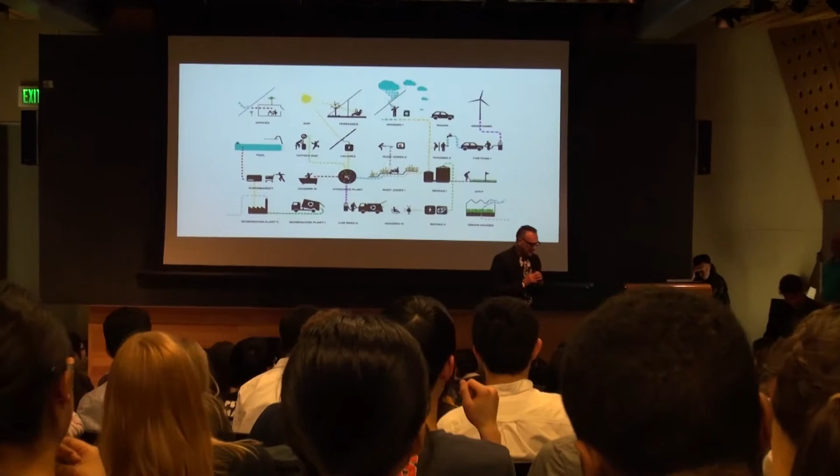I'm a graduate of Duke University. And you know, it's only Tuesday. They've already won a national title, and Bjarke Ingels is here tonight.

We're really happy to have Bjarke here. There's very little I can do to introduce him, you probably know a lot more about him than I know already. I will just say, for those who don't remember or don't know, Bjarke started out with an incredible practice with the best name of an office besides BIG, I guess, that I've ever really encountered: Plot. What an incredible title.

Also, it's a kind of a device, I think, for the way a number of practices in Europe operated, narrative-based, story-based, particularly OMA. I mean, if you all will remember, Koolhaas became a really important intellectual and architectural figure because there's a book, Delirious New York, that he wrote before he did very many buildings.

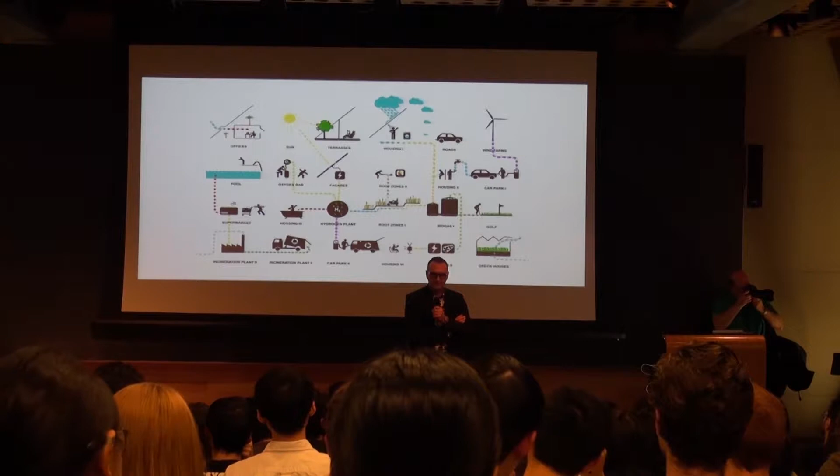There's a real way, I think, in which Bjarke started a practice in 2001 with Julien de Smedt called Plot, and then built a couple of really exciting buildings and made some small product design things and did some other things, and then founded BIG in 2005 and has really not stopped since.

At that time, the accent that charmed the world was a Dutch accent. And there's some real truth to the observation that someone made recently that that whole Dutch way of practicing, that whole intellectual model, moved north to Copenhagen, probably sometime around 2000, 2001, 2002. And now the accent that we're all charmed and taken with is a Danish accent, not a Dutch accent. I think that's true not only of the accent but of the ideas. That powerful intellectual model moved north.

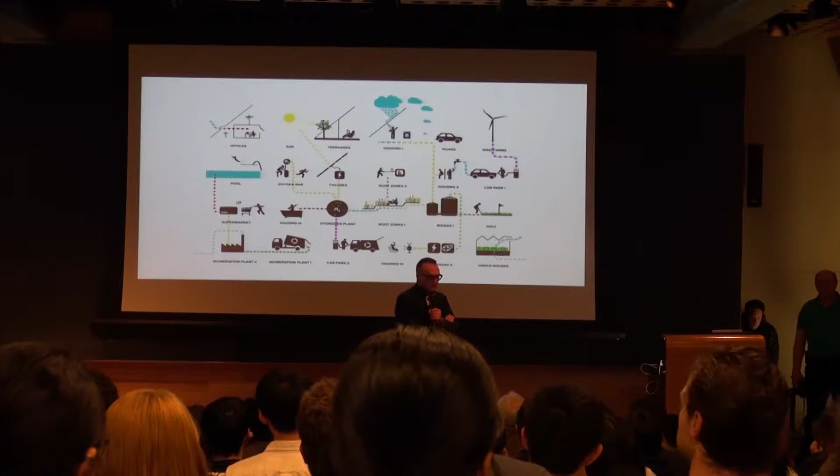As you know, and he'll show and talk about a lot of these projects, BIG has stakes put down on the East Coast with the 57th Street project, but more. Also very exciting, if you have not seen it, the exhibit at the National Building Museum will be up, I think, until August - an incredible show. The catalog is here, we have it in our library, and we'll get a copy of that signed later by Bjarke.

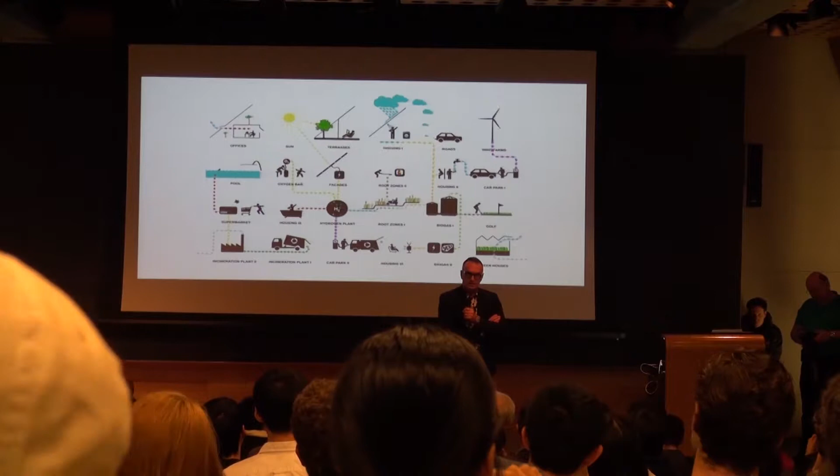Definitely should see that, but also he's doing, or the office is doing, a master plan, a 10-year plan for the Smithsonian. A lot of buildings on the West Coast, including, as you probably know, the Google campus, which is the coolest job I think ever. But with BIG, that's probably only the case for this year - next year they'll get the next coolest job ever.

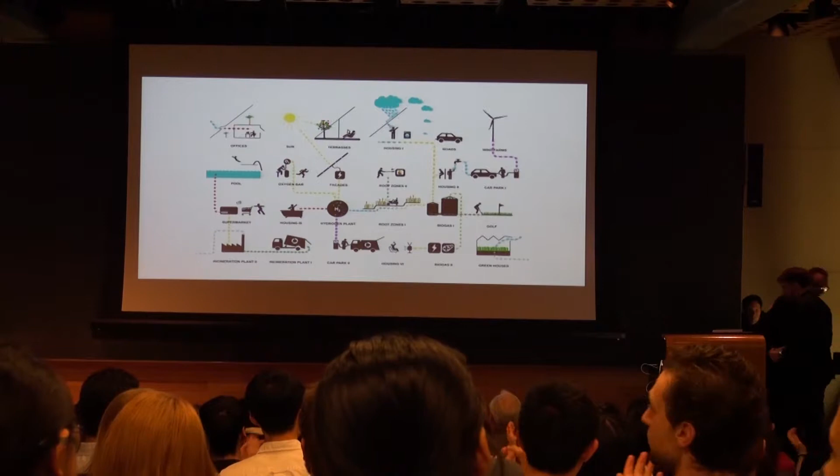Yeah, maybe just picking up on - we were just talking - I've been trying to come and visit Michael wherever he's been dean. The last time was at his former deanship, where he got a speeding ticket taking me to the lecture. So there's like some real investment in this.

But what I'd like to do is basically spend a little bit of time talking about the way we work in our office. Our office is obviously called BIG. We're located in New York and in Copenhagen. Our space is actually a former Carlsberg factory, where they used to make the least interesting part of the beer, the bottle cap.

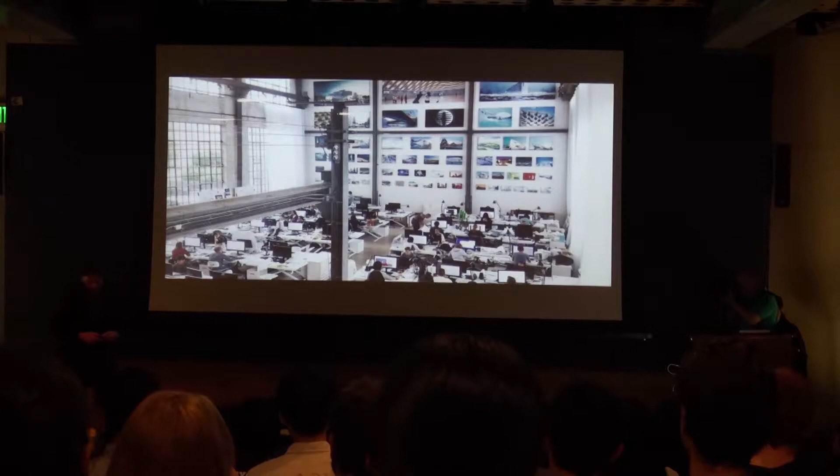We've diversified into haircuts.

Maybe every 5 or 6 years we've done a sort of exhibition looking back at the work we've done. When you're caught up in your work, you're only thinking about the projects at hand. But once in a while you have to look back and try to see if there's a red line going through the work so far. It becomes a way of almost like the Danish philosopher Søren Kierkegaard says, life is lived forward, but it's understood backwards.

We just came out of making the exhibition at the National Building Museum, this amazing space in Washington that I think nobody has ever been to. It's like this huge atrium with a gigantic colonnade on multiple levels going around, and they had given us 3 small galleries for our exhibition. They were really nice gallery spaces, but of course we really liked the atrium.

So we got this idea to turn the architecture of the museum into the architecture of the exhibition. Our galleries were placed on the 2nd floor, so we used them for films by various filmmakers showing the work after it's been completed. But we basically turned this sort of arcade into the exhibition design, so rather than building vitrines, each arch becomes a window onto a model suspended in the atrium. There's like 72 arches, so 72 models.

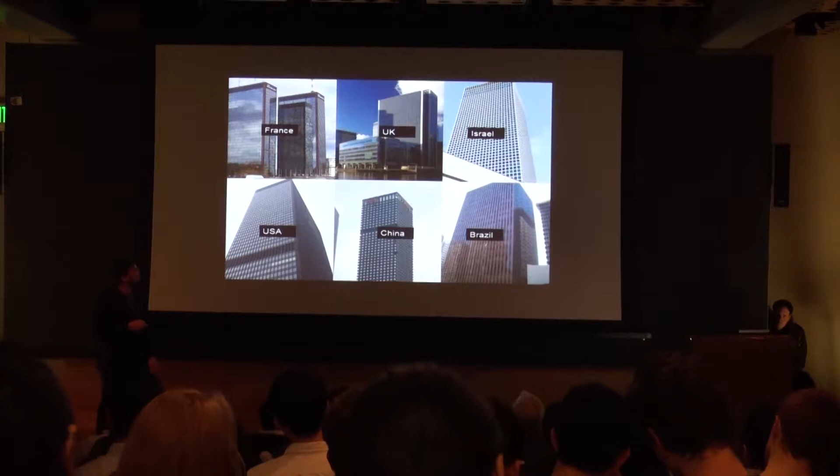What he was interested in was what he called vernacular architecture - essentially that over centuries, people in different places had found ways of responding to the local climate with local materials, optimizing living conditions and creating interesting architectural vocabularies that weren't academic or aesthetic, but purely empirical. Like the Greek villages with white surfaces that reflect heat, the flat roofs where you can enjoy the cool breeze in the evening. Like the igloo, also this perfect example where the spherical shape has the minimum surface to contain a maximum interior volume, creating minimal thermal exposure for the contained space.

These villages in China where the wind swept the flatlands - you have the sunken courtyards that are protected from the weather.

So what we in a way propose is not vernacular, like going back to vernacular architecture, but what you could call vernacular 2.0 - essentially using the fact that today we have sophisticated technology that allows us to calculate, simulate and model the environmental performance of a building, like the thermal exposure of a design, or the wind flows through a building or a master plan.

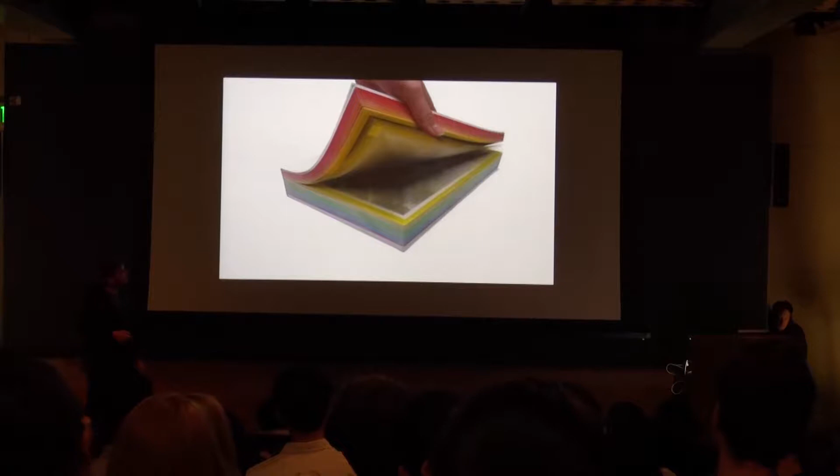And as a nice side effect, all this rainbow of frames become this nice gay flag on the edge of the book.

And also, sometimes the most interesting thing about a book is the cover. Here the cover is as white as can be, and it's actually the content that is the flashiest part of the book. And then it has a dust jacket, which is this thermal map, where hot and cold create this pattern of the flow from hot on the front to cold at the back.

So maybe just to start this odyssey, one of the warmest climates we've worked, and one of the first times where we started to work with this idea of engineering without engines, was when we got invited to do a competition for the main energy company in Shenzhen in South China, right next to Hong Kong. It's the most industrious region in the world.

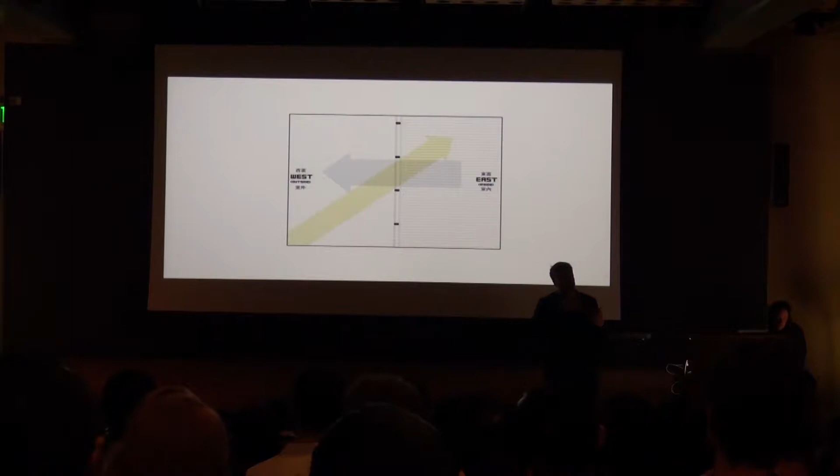Most of the stuff you own is probably produced in Shenzhen. So as a result, the energy company does consume and deliver a lot of energy. We thought: it's basically a 1 million square foot office building in a subtropical climate, and you have this dilemma between wanting to maximize daylight and views, but wanting to minimize thermal exposure and glare.

As a result, together with Arup, we developed this idea of a facade, almost like a pleated dress, that opens up to views and daylight to the north, but shuts off the direct sunlight from the south. So when you look towards the sun, you see these bamboo veneer walls washed in daylight, and as you turn around, it becomes a completely transparent facade.

Within this logic, we can pull out bigger openings for the main entrances. We can create this sort of stack of executive meeting rooms and the sky lobby.

So basically, this logic alone, without any moving parts, any sophisticated technology, actually reduces the air conditioning loads and the energy consumption by 30%. We developed the principle together with Arup. So there's nothing sophisticated - it's purely the geometry of the building that has this impact.

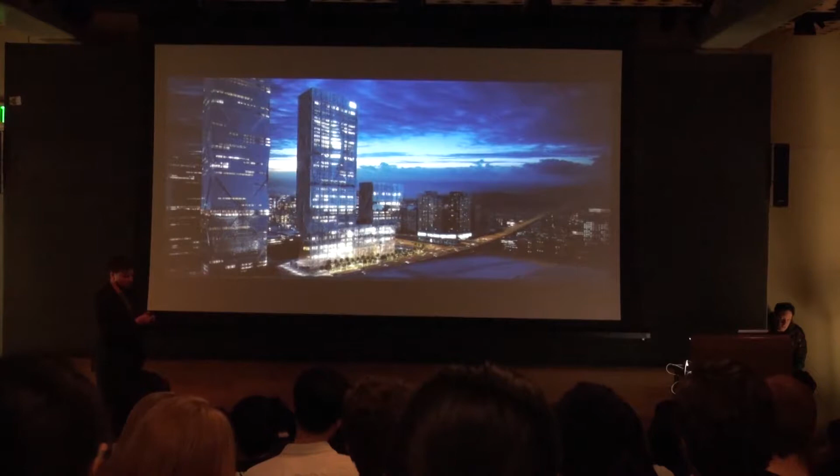Also from inside, of course, it has an impact on the experience of the building. And essentially the main idea is that what makes the Shenzhen Energy headquarters look different is also what makes the building perform different in terms of its energy pattern.

It's currently under construction in China. After digging around underground for three years, we're finally going vertical at a pretty amazing speed.

So basically, when we were looking into this project, we had won the competition on this design, and an interesting thing happened: the clients fell in love with the design of the building, like the way it looked, not so much the performance.

So we started developing the logic further, and we actually proposed a series of modifications to the envelope that would make it perform even better. But at this point, they had fallen in love with this reading that the building looked like a Chinese girl walking through the city or something like that, and we couldn't touch the design because it had already been signed off by decision makers high up in the food chain.

But then we got invited to do a competition for the Museum of the Human Body in Montpellier, in the south of France. Montpellier is almost like the cradle of modern medicine in Europe. Its proximity to North Africa and the Middle East made it a perfect place for the coming together of Western and Eastern medicine.

It's the home of the first botanical garden for medicine in Europe, the Jardin des Plantes. And the museum was going to be located between the city and this new park.

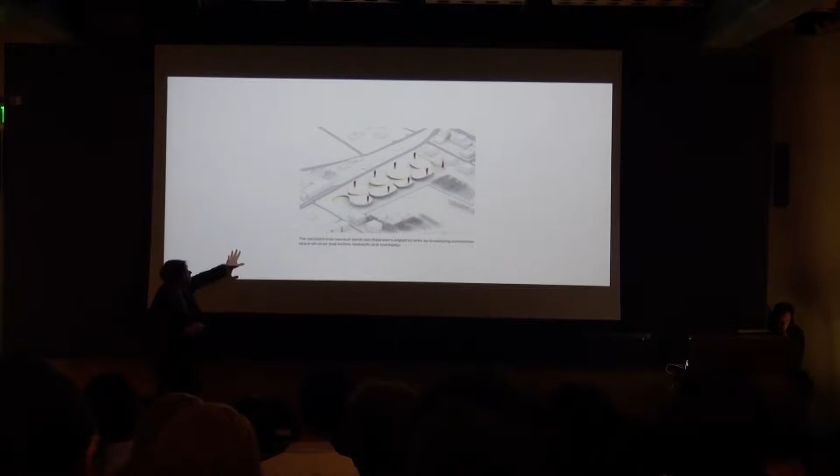We basically took this functional diagram and placed it in the park, but rather than becoming a big wall that segregates the city from the park, by having this sort of undulating zipper line, we dissolve the building. Even though it functions as a single entity, it ends up appearing as a series of pavilions, and it creates these pockets of city that come into the park, and pockets of park that come into the city, almost like a confluence of pavement and green space.

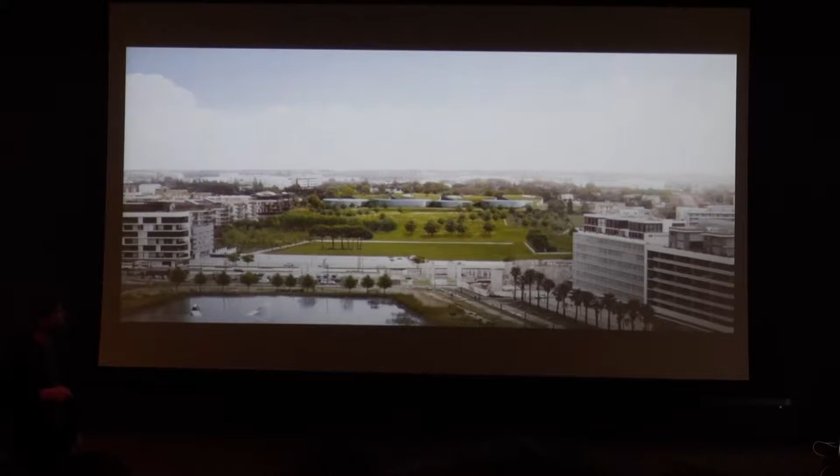So you see the city coming in and becoming like a little paved island overlooking the park. And in reverse, the park sort of flowing in between the hard paved spaces of the city.

Montpellier is not only the cradle of modern medicine in Europe, it's also the hottest city in France. So we wanted to have glass facades to create a relationship between the program and the park, but we would have to somehow provide some form of shading.

Following some of the logic we had developed in Shenzhen, we looked a little deeper into the issue. One thing we discovered in Shenzhen is that when you're facing south, the ideal louver is actually horizontal, because the sun comes from a high angle. Horizontal louvers block the high incoming sun and provide open views.

But when you are facing east or west, the more ideal louvers are vertical, as we did in Shenzhen. Also the main facades in Shenzhen are east and west facing, that's why the logic makes sense.

But when you apply this logic to a curvilinear facade, the ideal angle actually changes more gradually from horizontal through a whole series of different degrees of diagonal to vertical.

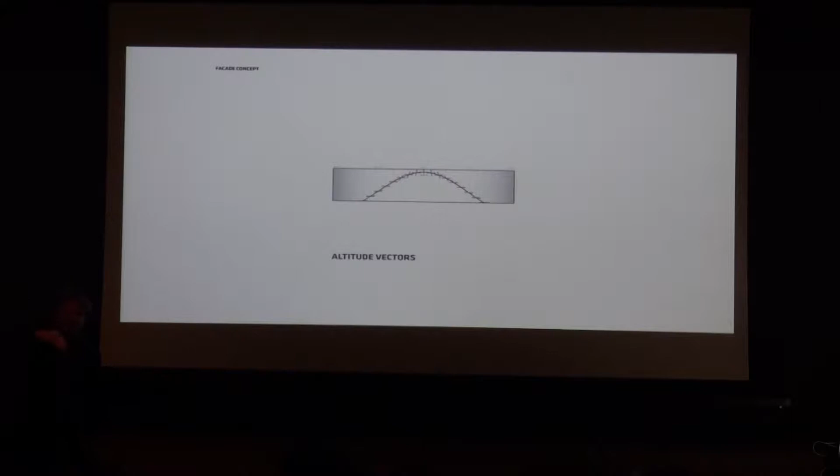So we created a script that is actually applicable to any location on the planet, but in this case we did it for Montpellier, where we can calculate the incoming angle of the sun for different orientations of the facade. That translates into this curvilinear pattern that almost looks like a human thumbprint.

It gets this sort of ornamental character, but it's really a scientific approach where each orientation of the louver is optimized for the angle it's facing.

So we applied this script to the facade, and as a result we get this almost environmental ornament on the facade depending on where it's oriented.

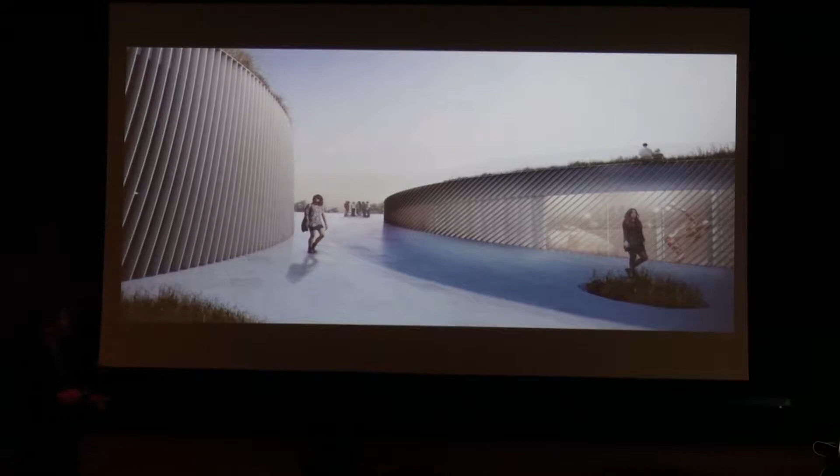So everywhere you encounter the building, this organic aesthetic is purely a product of optimizing the environmental performance of the envelope. In a way you can actually turn the environmental performance of the building into something that really drives the aesthetic aspect of it.

Sadly, shortly after we won the competition, there were elections, and the new mayor is a former postman, and now he wants to make a postal museum instead. So I think right now our biggest challenge is to convince the mayor that this could also be a very nice postal museum.

The response to the climate doesn't have to be defensive. It can also be embracive and joyful.

One example is that we're doing a project in Nassau in the Bahamas, in a community called Albany. It's Tiger Woods and two real estate developers that have come together to make a very nice place for fortunate people.

It's actually, if you watch the scene where Daniel Craig comes out of the water in Casino Royale, flashing a perfect torso, that's this place. And they made a marina where you can park your 300-foot yacht. When I was there on a site visit, Steven Spielberg was trying to park his 300-foot yacht.

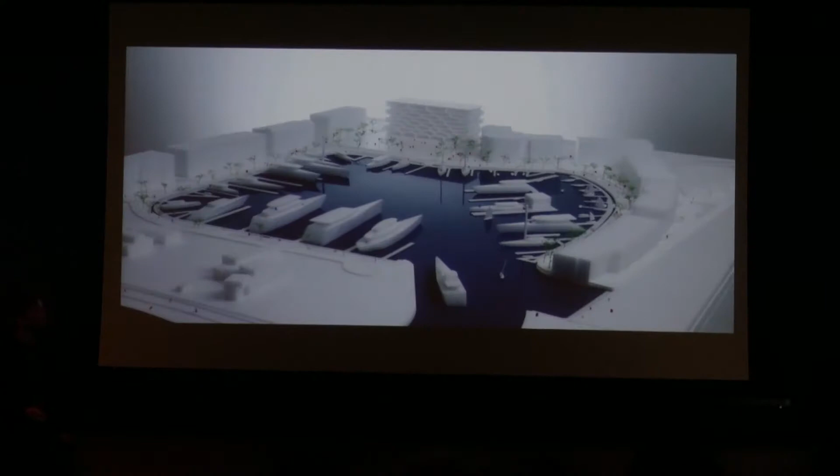And there they asked us to do a project of basically these condos facing a square. Because it's such a nice climate, it's facing south, it's overlooking the marina. They wanted each home to have a pool on the balcony and a 15-foot deep balcony.

They had already done it on three buildings under construction, in the form of making a bathtub, like a giant bathtub on top of the balcony. And we thought, if you're going to have a pool on your balcony, you really don't want to jump up into it, you want to step down into the view and overlook the marina.

So we designed each balcony in such a way that it sags in the middle to create a space for the pool. The body of water always sits on top of the partition wall of the two units below, so that the 12-foot tall concrete wall can actually function as a giant beam to carry the load of the water.

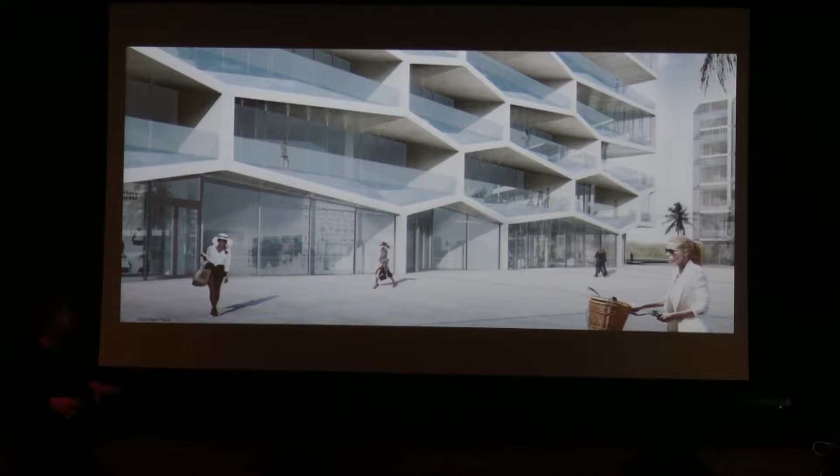And basically, from the outside, this way of incorporating the pool sort of creates a character for the homes. Also, the sloping ceiling of the balcony becomes almost like a porch, almost like as if you're living in your own little villa.

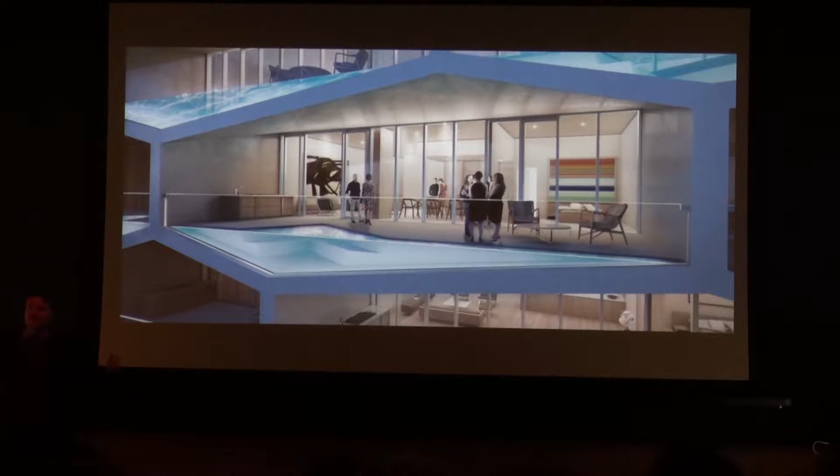And basically the handrail, like normally when you make renderings, you kind of cheat and you eliminate all of the practicalities and you just have a single sheet of glass. In this case, it is actually a 75-foot long single sheet of acrylic aquarium glass that is the handrail and the facade of the pool.

So it's like this sort of incredibly slick, non-detailed balcony. Also, of course, it really becomes the facade of the building, so if you're skinny dipping at night, you need to make sure you have a rigorous fitness regime. But essentially, almost like the entire facade of the building is just the blatant expression of the unique quality of each home that suddenly comes together in this sort of honeycomb-like pattern.

You see, like in general, as the journey moves from the warmer climates, the projects really become about the climate, either resisting it or enjoying it. When you go towards the more temperate climates, other factors take over, and one factor can be the heritage of a place.

We recently completed a building for the Danish Maritime Museum that is located right next to Hamlet's castle Kronborg in Elsinore. The castle used to be the home of the museum, but then it became UNESCO World Heritage, and they had to kick the museum out and restore the old ballrooms to back when the king was around. And then the suggestion was basically to put the museum down in this decommissioned dry dock where they used to build ships. It's right outside the castle moat.

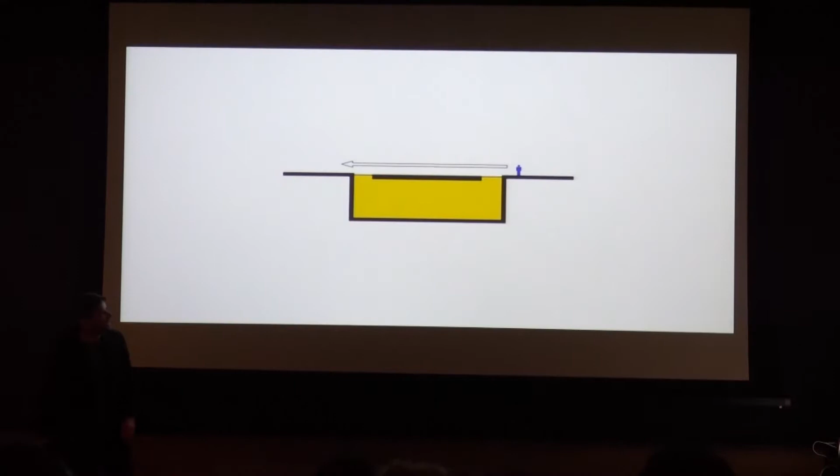And there was some kind of a dilemma, because UNESCO said that we had to stay below ground. We couldn't stick as much as a foot out of the ground to not interrupt the view of the castle. But of course the museum wanted some kind of architectural masterpiece to attract visitors.

So we got the idea of basically turning the dock inside out, using the museum program to preserve the dock as a courtyard sunken into the ground. All we had to do was design a series of bridges: one that stops the water from coming in, one that connects to the castle, and then, because we weren't even allowed to stick an elevator out of the ground, the last bridge is actually a gently sloping ADA accessible ramp that takes you into the museum.

Also, to prevent cars from driving off the road and dumping into the dock, we put these granite benches that are designed like the elements you moor a ship to. And they're actually put down in Morse code, so there's a little Easter egg for people who can read Morse code.

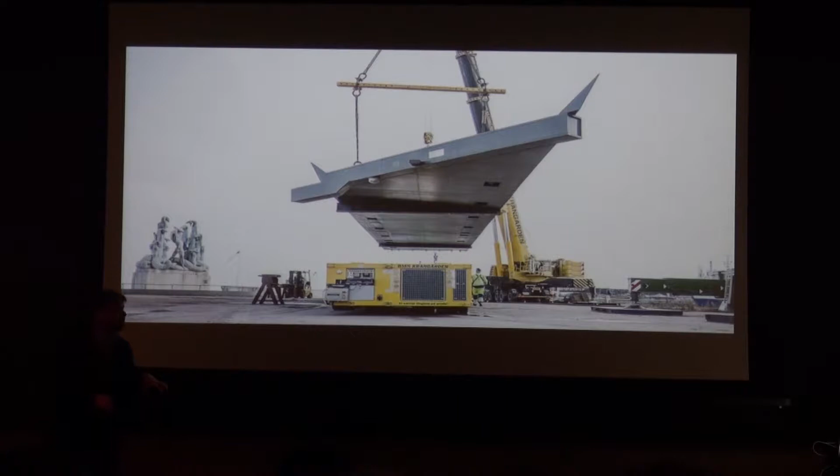So then we started the excavation. We could build the bridges in a shipyard in China, manufactured like giant ships, basically. Then sail them into the port and lift them into place like giant elements.

So you see this sort of gradually descending ramp, and also maybe notice that the ramp is sunk into the roof so that the handrail is part of the steel structure of the roof, and you'll notice that the upper part of the bridge is very deep, like 6 feet, whereas the floor slab below is incredibly thin.

We'll return to this. So you see this gradually descending ramp that takes you into the exhibition, and then here the floor continues sloping with a very gentle slope, 1 to 60 — essentially the same slope that you have in a bathroom floor. So it feels flat, but it allows the water to drain, and it actually allows people to go 2 floors down as they move around the dock. Some spaces are very intimate in proportion, some are very generous.

Also, by code in Denmark, you have to have windows for workspaces. You can't have skylights or no windows; it has to look into something. So originally in the brief, all of the administration was put in another building. And now when we turned the dock into a courtyard, we could actually put the offices of the museum staff inside the dock.

These are earth anchors that tie the dock down, because as soon as you drain all the water out, it becomes a giant ship that wants to pop up and float away. So these anchors actually go 120 feet into the ground, which means that the Maritime Museum in Elsinore is actually paradoxically the tallest building we've built in Denmark — it's just from the horizon and down.

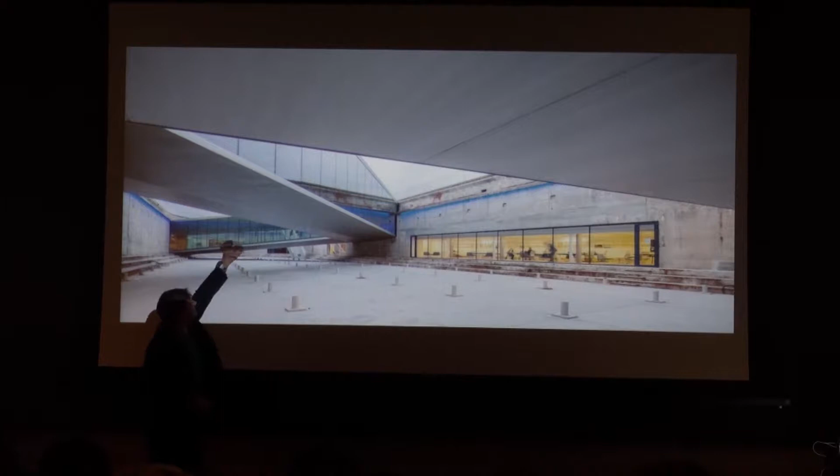Here you can see the skinny floor slab of the zigzag bridge below, and the big proportion above. That's basically made possible because the handrail contributes to the load-bearing capacity of the beam above.

Then at the halfway point, we inserted a traditional anchor chain, so the floor you're walking on is actually hanging from the ceiling above you. So it's not a piece of theater, it's actually a hard-working part of the architecture, just like the dock wall where they used to build ships is a real part.

It's not a piece of set design, it's actually the actual dock where they used to build the ships. This grid-like installation of little dots is actually the tension rods that keep the building from floating away.

Here you see the auditorium, where the slope of the auditorium continues under the stage and becomes the auditorium for children.

The restaurant, where the dock wall sort of continues inside, almost as a Roman ruin, left completely the way it was left by the shipbuilders. So in general, you have this striking contrast between this incredibly contemporary world from the horizon down, and then above, the unmolested view of the historical castle.

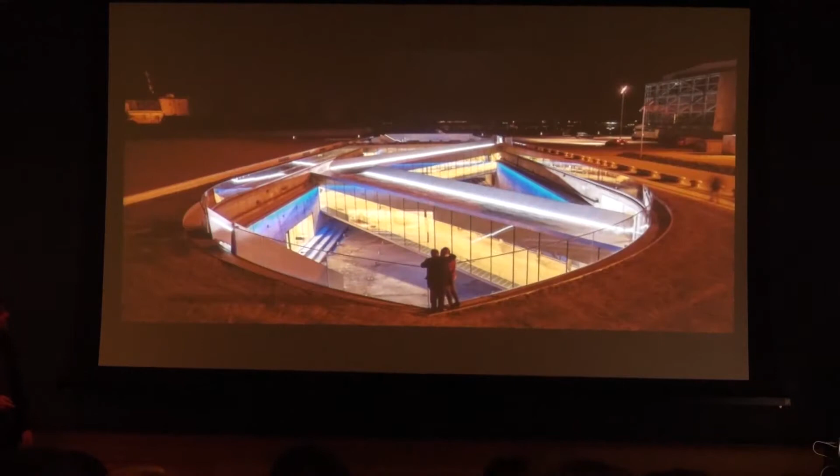This is this sort of inverse Titanic moment.

Basically, the whole idea is that for each project, the design process is always about trying to identify what specific piece of information we need to inform our design decisions. We always spend the beginning of a project trying to educate ourselves on the specific problems or aspects of this particular project, then try to identify what is the greatest problem or biggest potential we can realize with this project, to establish the design criteria, and then identify all the knowledge we need to make informed design decisions.

That can be like the preservation of the historical heritage in the case of the Maritime Museum.

Or for instance, we got invited by my old high school to make a big multi-hall for the school. It could be placed in two places, either on the sports fields where they play soccer, or in the courtyard. Since football is the national sport of Denmark, or like most European countries, it would be very unpopular to shut down the outdoor football fields.

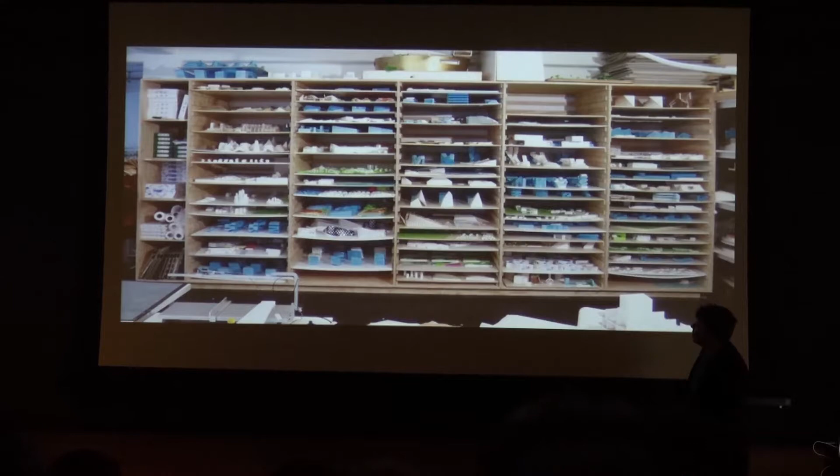So basically, once you've identified what a project is all about, what's the dilemma, what's the challenge, what's the potential, you don't necessarily have the answer. You have the question, but you don't have the answer yet.

So as part of our design process, we built tons of models to try to test different ideas. So basically, to give you an idea about what a process like that can look like...

We're doing a project in this sort of beautiful landscape. It's the Vallée de Joux in Switzerland, nestled between the Jura Mountains and the Alps. It's Le Brassus, a village famous for being almost like the cradle of Swiss watchmaking, and it's the home of Audemars Piguet, the Swiss watchmaker.

That is one of the few Swiss watchmakers that is still on family hands. It's owned by the descendants of Monsieur Audemars and Piguet. And we were invited for a competition to design a museum of watchmaking. It's basically next to the building where Monsieur Audemars and Piguet had their first workshop 150 years ago, and this is their current headquarters.

So our first thinking was to try to wedge the museum in the gap between the two historical buildings in different ways. We tried various ways of fitting in an elegant way, but in the end, it always felt like we were butting in between two existing buildings with some unwelcome new addition.

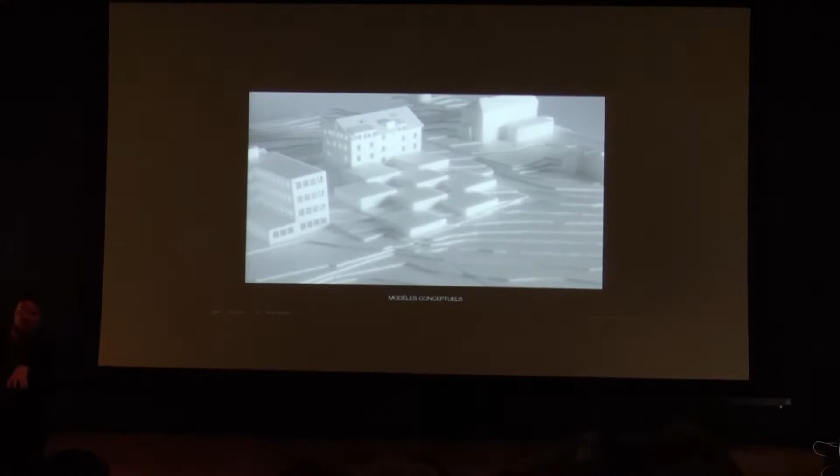We thought maybe we should stay low at the back, away from the main street, overlooking the landscape. We thought maybe the museum program with the different exhibition spaces could be almost like a little village of interconnected galleries. We try to organize it as a linear program, like a route where you end up visiting the ancient workshop where it all started.

But somehow it became hard to control the process. Maybe we should just stay as part of the landscape, and then gradually, like the investigations took on a life of their own.

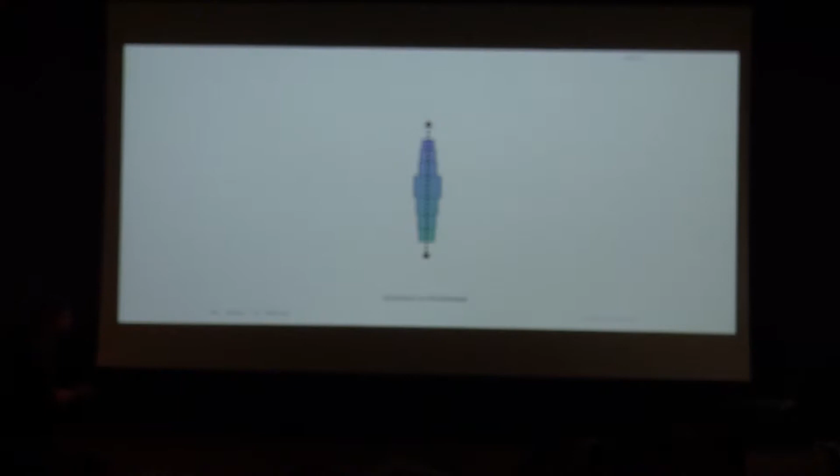So basically, the thinking we ended up with was to take the program that has this series of spaces, from small to big and to small again, turn it into a single linear narrative, and then coil it up like a double spiral that fits on the site and creates a big space in the middle. So basically, it becomes this spiral where you go through the journey, have the bigger spaces in the middle, and then finally you reach the historical workshop, and then you're done.

Then we allow the roof to follow the slope of the landscape to bring light and view deep into the floor plates. So it becomes almost like this ressort spiral, the coil inside a watch that actually delivers the energy for the timekeeping piece.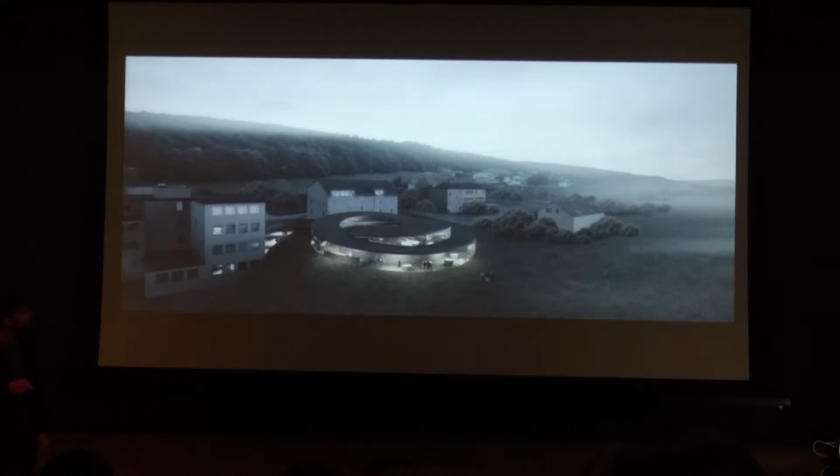So when you arrive through the existing headquarters, the first thing you see is this view over the valley, and then you have a series of spaces, some with very controlled lighting conditions, some where you actually pass through some of the specialty workshops with beautiful views of the surrounding valley. And then you find yourself in the middle, and you'll notice one thing: because of the slender roof and the abundance of glass, you actually have the presence of the mountains everywhere in the exhibition. And you notice that there are absolutely no columns.

That's basically... can I borrow this? It's because one of the main aspects of watchmaking is this idea of trying to squeeze the maximum amount of performance out of the minimal amount of material. Miniaturization and skeletonization is part of the aspects of watchmaking.

And glass is actually stronger than steel when it comes to compression, but it can't take tension, and it has a tendency to buckle in earthquakes, and when it buckles, it breaks. And you have earthquakes in the Jura Mountains, but because of the continuous curvature of the glass, the curvature actually lends rigidity to the thin piece of material.

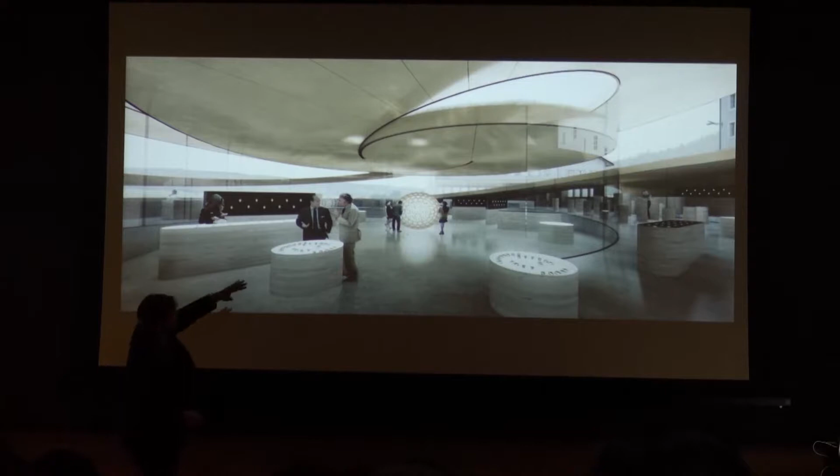So because of the curvature of the walls, we can actually use the glass as the sole support for the ceiling. So you have this very magical floating ceiling, incredible transparency, bringing the valley into the exhibition. And then finally, you have this stair that takes you to the workshop in the attic.

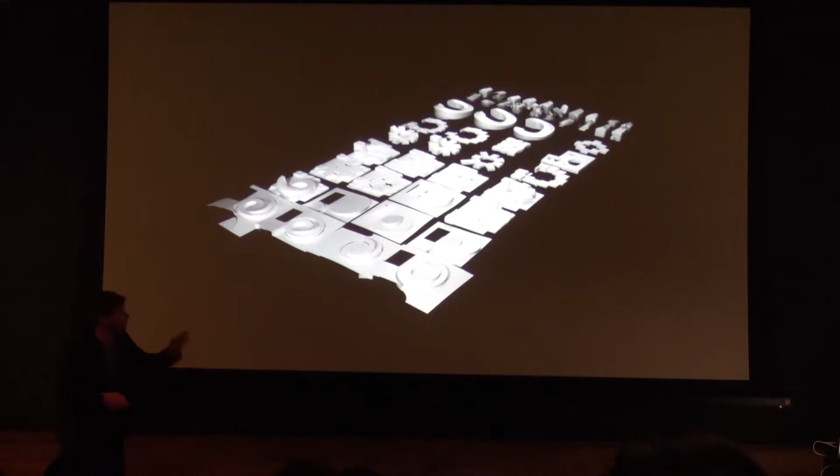So when you tell the story like this, it seems almost like a linear process of cause and effect that brings you to what feels like the obvious answer for this program on this site. But actually, in order to get there, we had to kiss quite a few frogs before we found the main idea. So first you identify the criteria that are going to shape the project, and then you start testing it with almost a process of trial and error.

As part of this, we make a lot of models in our office. Sometimes we make giant models, and sometimes we make models out of Lego. As a result, these are just some random photos from the office, you have a residue of Lego everywhere. Even the signage on our shelves is made out of Lego.

When we got approached by Lego to make a museum called the Lego House that essentially looks at the culture of the world through the eyes of Lego, we were incredibly excited.

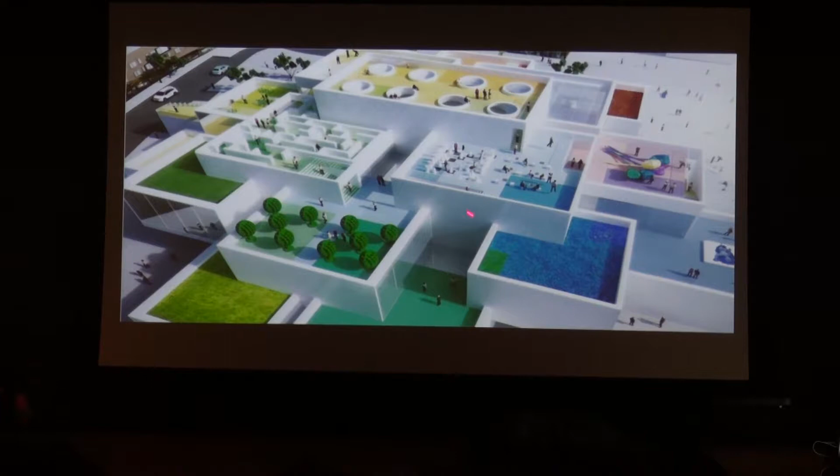We went completely bananas. This is a typical residue of the design process, different models, testing ideas, a lot of information and studies on the walls. It resulted in a project currently under construction for the Lego House in Billund, which is where Lego is from. It creates a big public square inside, and underneath this cloud of interconnected exhibition spaces, the roofscape becomes a series of connected playgrounds where not just visitors to the Lego Museum, but all of the citizens of the village in Denmark have access to this man-made playscape on top of the building.

We laid the foundation stones last year. This is one of my favorite photos - it's me and all of the richest people in Denmark.

I like this idea that the richest guy in Denmark is the guy who owns Lego. It's almost like a Willy Wonka kind of situation.

And also the project is actually already available as a piece of Lego architecture. I think it's one of the few pieces of Lego architecture where we didn't have to modify the design to make it buildable out of Lego.

So moving on, we're still in temperate climates - other aspects that can influence design can be the synergy between the different parts of the program.

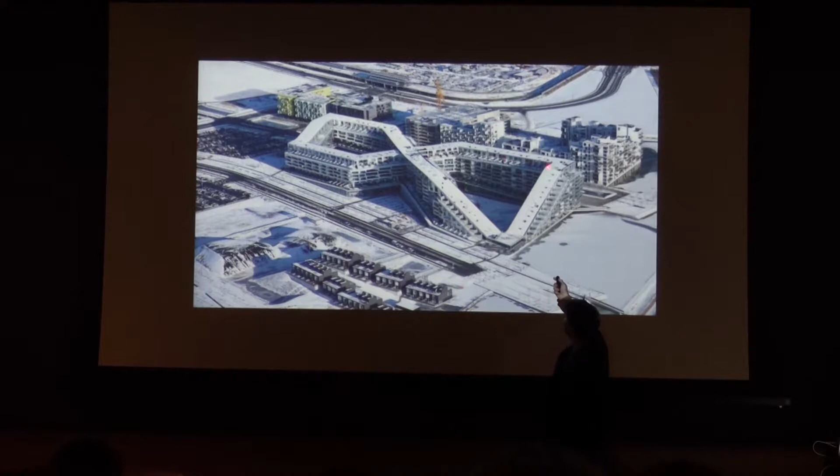One of the projects we did in Copenhagen is a mixed-use building with shops and offices on the ground close to the customers, and townhouses and apartments placed on top. We exploit the difference in depth between commercial floor plates and residential floor plates to create this man-made mountain path that takes you all the way to the penthouse in a seamless extension of the street. It's located at the city limits of Copenhagen.

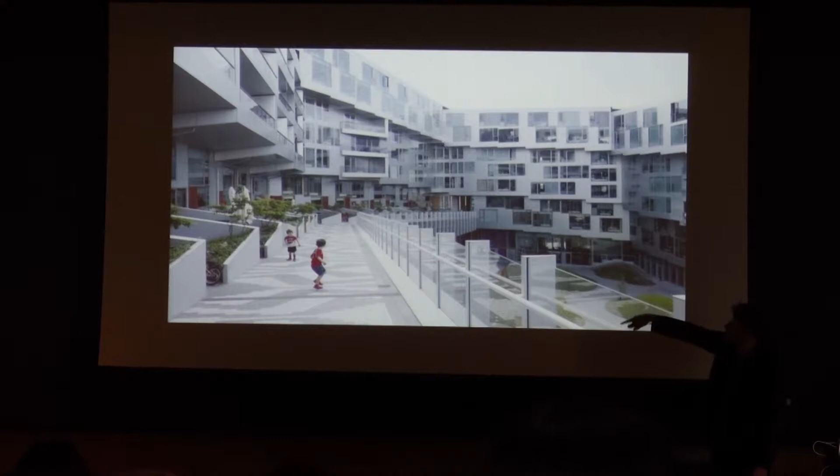And part of the exhibition in Washington is that Louise Lemoine and Ila Bêka made a film called The Infinite Happiness. The building is called the 8 House or the Infinity Loop. They basically moved into one of the apartments in the 8 House for 21 days and did 21 diaries, which is a really beautiful 19-minute film where you can see the impact of the social possibilities of the architecture on the life in the building.

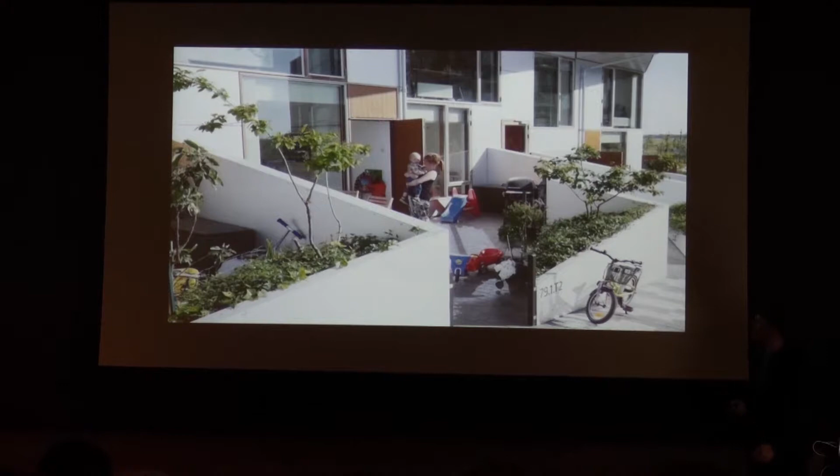Where the 8 House intersects itself, we took all of the amenities and connected them with this bouncing stair that connects all the way from the street to a shared roof terrace. And essentially the 8 House isn't just a nice facade or an expressive sculpture - it's really a three-dimensional urban condition.

These two people, they actually get to know their neighbors. These two girls are neighbors living on the 8th and the 10th floor, and they can literally walk down and invite each other to play. So you have a much more lively social organism than a typical vertical stacking of homes.

So in this sense, it's basically the programmatic synergy, the optimization of the different constituent parts of the program that creates the architecture.

As you can see, often the public aspect of a project is quite important to us, as are the concerns for the users. But in one case, we actually reached out to the users and had them co-author the design in an open source design process.

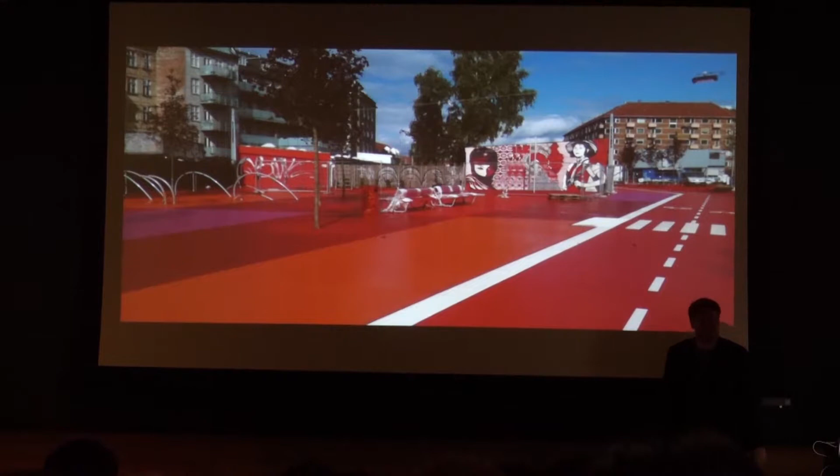We got invited to do an urban space in Copenhagen. It's a mile long, and it basically consists of what we call the red square, where everything is shades of red, the black market, where everything is black and white, and the green park.

It's located in the most ethnically diverse neighborhood in all of Denmark, with more than 60 different nationalities. So this project was all about creating ownership and integration. We thought, why don't we use it as a resource? We reached out to the local community and had people recommend elements from their home countries. We had public meetings, a website, a Facebook page, ads in the newspapers, and people ended up recommending elements.

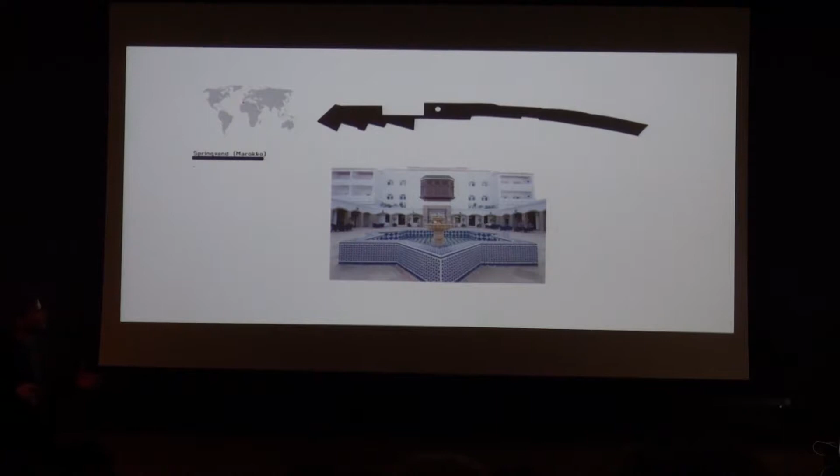The basic idea is that we don't eat Chinese food to be nice to the Chinese, we do it because we crave Beijing duck or noodles. The same idea is that we didn't put a Moroccan fountain in Copenhagen to be nice to the Moroccans, but because they have an amazing tradition for architectural water features.

There's a Jamaican sound system where wirelessly you can connect your iPhone and have an outdoor concert. The neighbors obviously hate this element, but it's actually designed so it can't play louder than the allowable volume, and it shuts off at 9 p.m.

There's a Thai boxing arena from Thailand, swings from Iraq, trash cans from Great Britain, bollards from Ghana, bicycle racks from Finland. The sign on the red square is an actual sign from the Red Square in Moscow. There are awesome bus stops from Kazakhstan. We found palm trees in China that actually grow in a Danish climate naturally. There's also nice octopus equipment from Japan.

That sort of shows that play is this ultimate element across language and culture. When you look at the benches, it becomes like a cultural study. You have a Mexican S-curve love seat where you're looking the person you're sitting next to in the eyes, and a Belgian bench where everybody looks away from each other. It becomes almost like an architectural safari in urban space, down to the lamps.

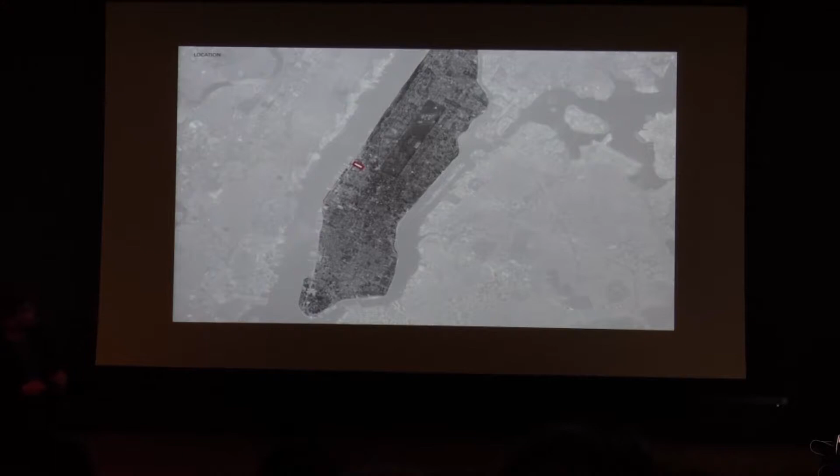I often get the objection that this only works in a semi-socialist Scandinavia. But we got invited about 6 years ago or 5 years ago to look at a site on the west side of Manhattan - that's why I moved to America in 2010. It's a site on the waterfront, but it's sandwiched between a power plant, a sanitation garage, and the West Side Highway. It's quite far from Central Park.

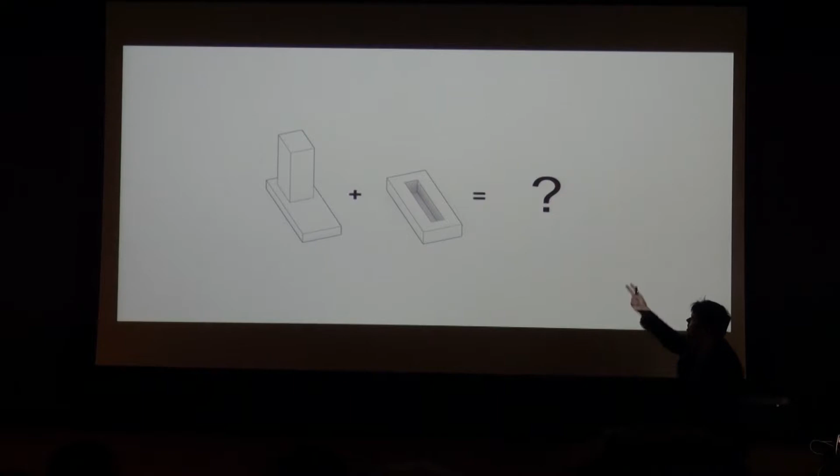We placed the courtyard next to the existing building. We provided the density of a high-rise by lifting it up to 500 feet in the northeast corner, keeping the southwest low to make it open for sunshine and views over the water. The result is this rather striking new silhouette on the waterfront of Manhattan.

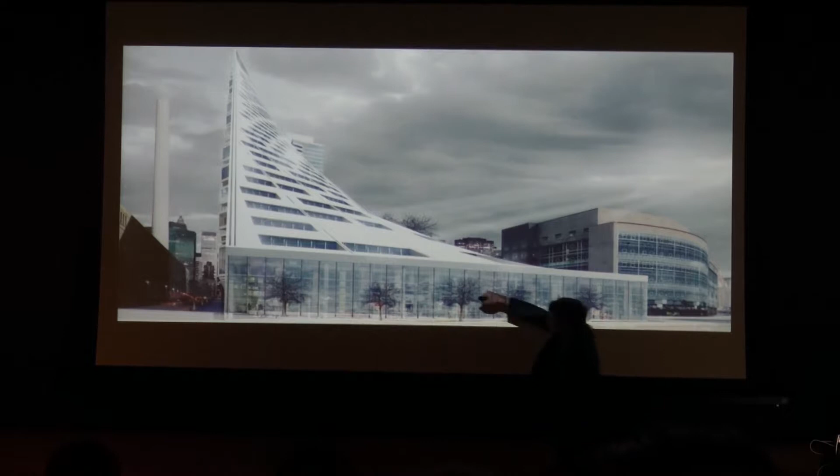You have terraces that are sunken into the roof, so each home actually has nice balconies. From the east, it looks like a spire. When you enter the lobby, you're invited up into this courtyard that actually has exactly the same proportions as Central Park, only it's like 13,000 times smaller - sort of a bonsai Central Park. You have this incredible contrast between the height of a handrail in the southwest to the height of a high-rise in the northeast.

The terraces in the roof - I think this is really one of the striking things of the project - when you're living here, you have the privacy and intimacy of your own private space in the middle of the city. But then when you go to the edge, you find yourself part of almost like an alpine community. You can actually see all your neighbors around you. It went through a rezoning process and is currently under construction. This is what it looked like a few months ago.

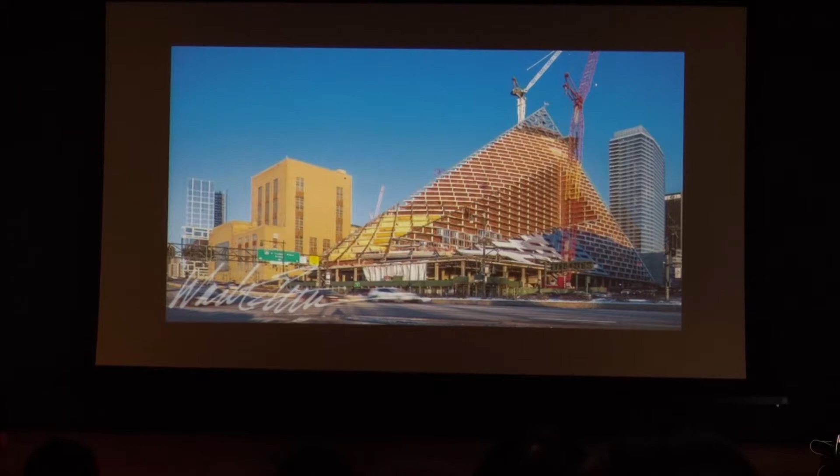There's a nice topping ceremony, with stars and stripes placed at the pinnacle or apex of the pyramid. It will be a striking addition to the west side waterfront of Manhattan—essentially the unlikely hybrid of two seemingly mutually exclusive typologies, the Scandinavian courtyard building and the American skyscraper, combined into a new entity.

Having just arrived in New York, Sandy came and shut down my apartment and my office for two weeks. It took the whole city by surprise. Also, according to the New Yorker, it gave rise to a new neighborhood in New York: SoPo, south of Power.

With rising temperatures, the Atlantic hurricane belt has expanded north and south, meaning the northeast coast of America is being hit more frequently by stronger hurricanes. Because of the funnel shape of the New York Bight, New York City has an extra risk—50% of the city is at risk.

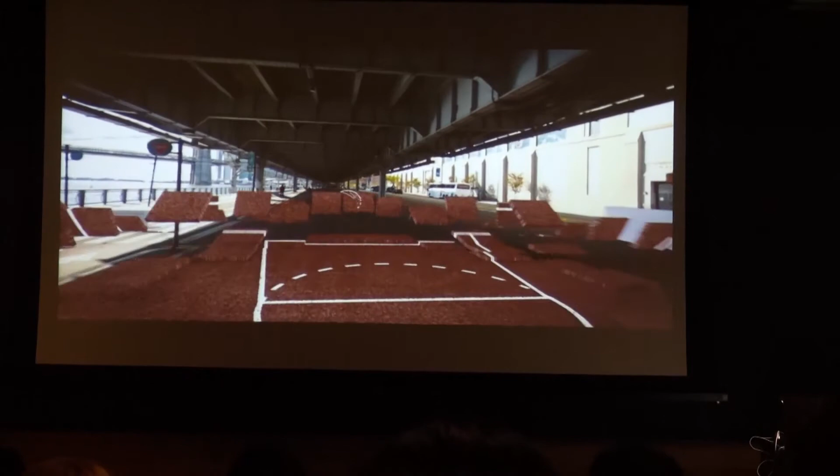Something that just brings more walks, different walks of life. Another escape from just the busyness and the hustle and bustle. There's this great space that could really become community space, cultural space, and active uses. Everyone enjoys space, and in New York and other congested cities, it's hard to come by.

Anything that makes the cities greener is just such a wonderful thing, not only for the environment, but for the people that live in the city too, to be able to be around that space. The plans, the berming, the sense of how it can become part of the natural landscape itself, and how we want to program that, is really the next challenge.

We are the link, we're the tip in the sense of the Big U. It's important that the entire waterfront of Lower Manhattan build the plans that have been put forward, because we can not only fortify this great city of New York, but be a model for cities all over the world.

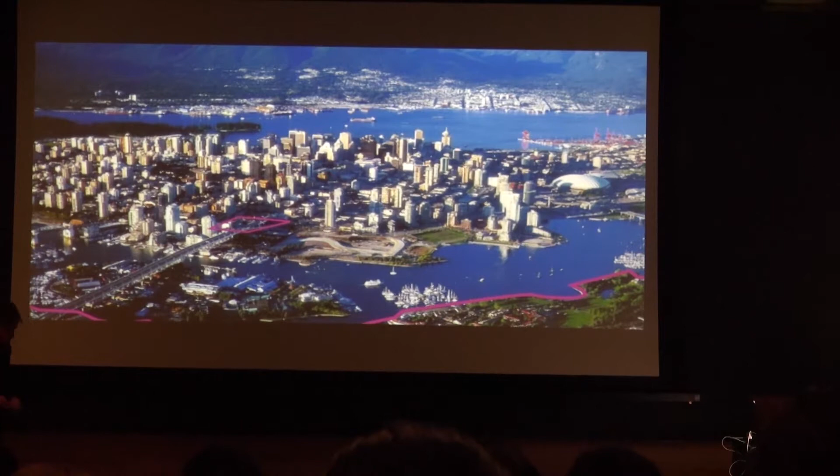Basically, the dry line has now been funded with $335 million from federal funds, and we, together with the City of New York, are starting the East River part of it. So basically, sort of an extreme open-source design effort.

Having moved to America, we also started encountering a whole new sort of form of density and building typology. We're doing a project in Vancouver, which is still a rather temperate climate. So again, it's not the climate that's dictating the architecture. In this case, it's the context.

It's located right where Granville Bridge hits downtown, and it slices this piece of land into these useless triangles. There's a series of setback requirements from the streets, setback requirements from the bridge. There's another setback of 100 feet because the city wants to make sure that nobody lives and looks straight into the traffic of the bridge. Then there's a park where we're not allowed to cast any shadows. So we're left with a tiny triangular floor plate, 6,000 square feet, which is almost too small to build.

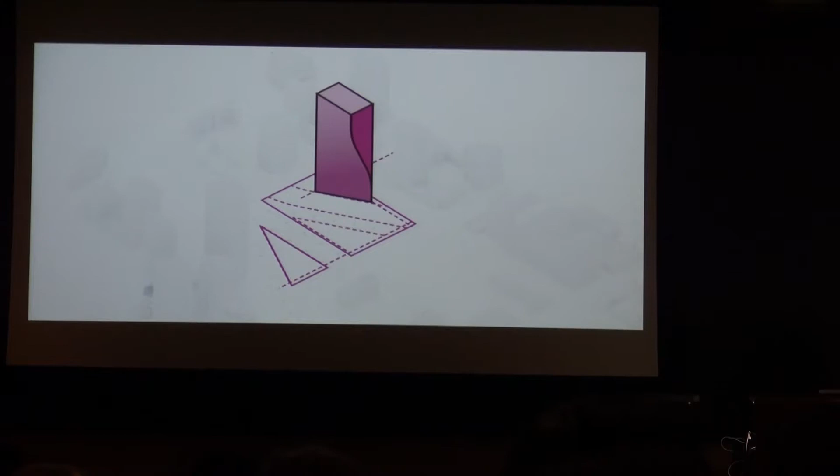So we thought, if the 100-foot setback has to do with creating a minimum distance, once we get 100 feet up in the air, we can actually come back out and create a floor plate twice as big, 12,000 square feet. That means when you drive over the bridge, it's almost as if someone is pulling a curtain aside, sort of 'welcome to Vancouver.' It has this feeling of a genie coming out of a bottle, growing to twice the size. Because it's a gradual transition, something you call walking the column.

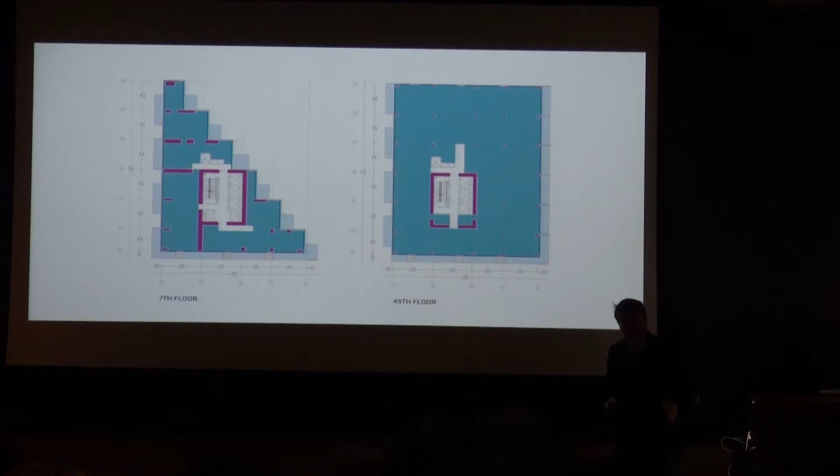There's no shocking cantilever. It's basically the columns at the top gradually turning into wall slabs that make the transition. It's never more than a foot per floor - this is the top floor and this is the bottom. Also, even though it looks both curving and triangular when you look at the building, everything is 90 degrees only. It's super rational and super modular, but when it comes together, it actually creates this rather unusual silhouette.

In a way, it reminded us of the Flatiron. The Flatiron is a product of this moment in Manhattan real estate history where the rise in real estate prices and the advent of steel structure and elevators suddenly made this plot - which had been useless because it sits at the intersection between Broadway and the grid of Manhattan - suddenly become the namesake of a whole neighborhood in the city. Except we're taking that idea one step further.

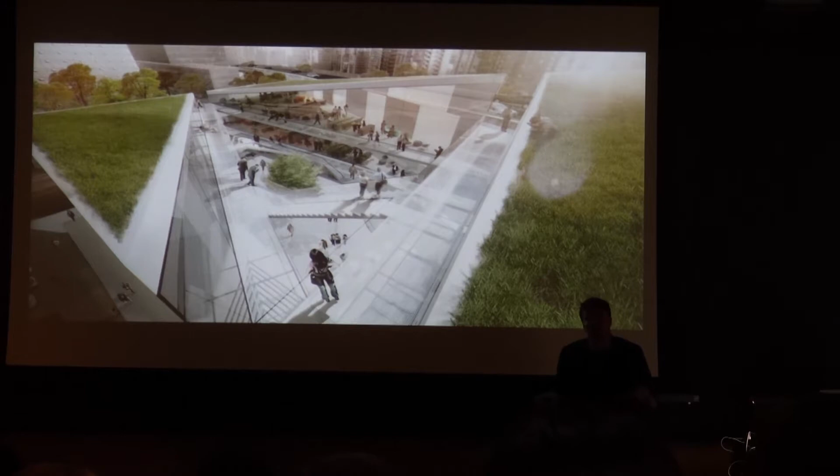And basically underneath the bridge, we can do shops, offices, restaurants, and we're trying to turn the underside of the bridge into an attraction. So we're working with a series of local Vancouver artists, including Rodney Graham, to turn the underside of the bridge into what you could call the Sistine Chapel of street art, almost like an art gallery turned upside down, with these photo prints that illuminate the space underneath the bridge.

We just broke ground on this project three weeks ago in Vancouver. The same client approached us to do a project in Calgary, also in Canada, which was going to be essentially

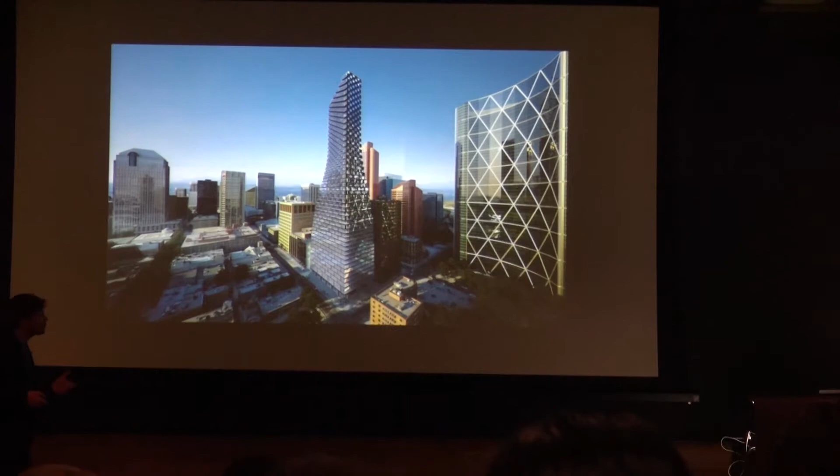headquarters for TELUS, the cell phone company, and residential. And it suspiciously looks like we took the Vancouver Tower and turned it upside down. But basically the lowest part of the building is an office building where you want to maximize the floor plates to be as efficient as possible. And then on top you need more slender floor plates for residences that also want balconies. But TELUS wanted the whole tower to look as a single identity, to be the TELUS Tower, instead of having an office building with a residence on top.

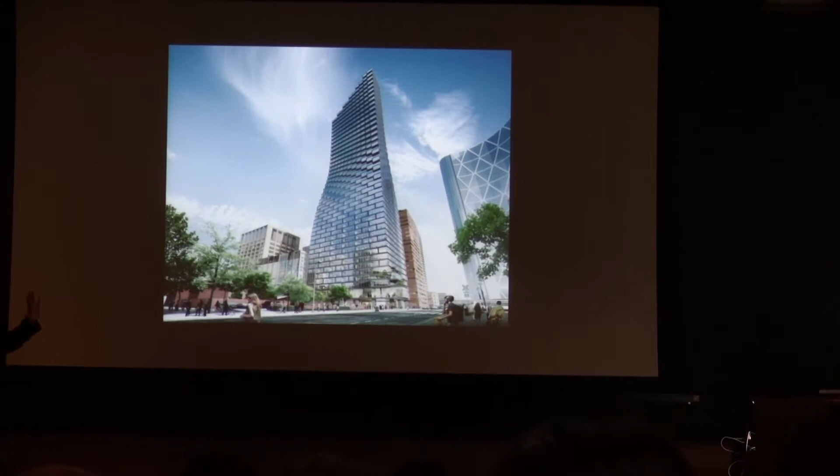So by making this seamless transition from office to residential, the smooth facade of the offices becomes the facade with balconies for the residences. As a result, it also becomes the most slender tower on the skyline. So in a way, two rather different conditions have almost the same but opposite architecture as a result.

Finally, if we skate through some of the colder climates we're doing, again looking at how the context of a project can inform its architecture. We got invited to do a museum in a sculpture park in Norway, a beautiful park on either side of a river. We thought, instead of locating the museum ourselves, what if the museum really becomes part of walking through the sculpture park? There's an existing bridge, and what if the museum becomes the other bridge, so it turns the whole sculpture park into a single loop?

We have a three-story stack of galleries where the path enters into the galleries. The skylight, where you have the sculptures, turns 90 degrees and becomes a panoramic window overlooking the river. And then you continue your journey through the park. So the building basically becomes this hybrid between a museum, a bridge, and an art piece in its own right. When you go through the sculpture park, you might actually see the museum as one of the biggest sculptures in the park itself, rather than a building that is different from the park.

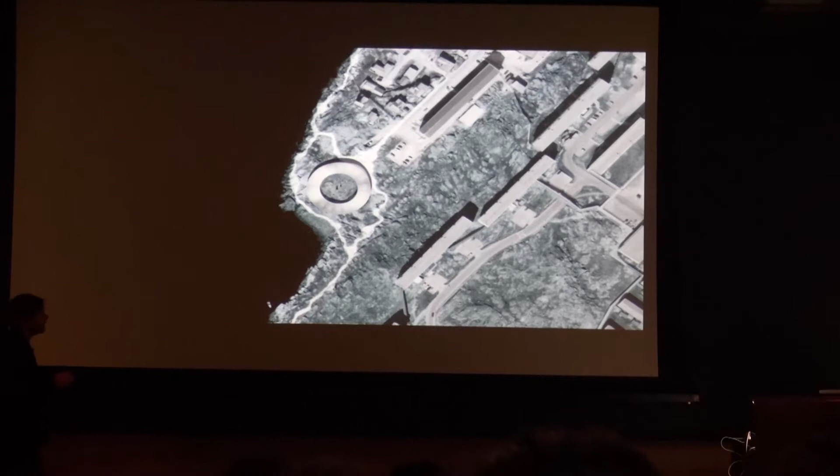So we thought, what if we designed the new museum as the smallest possible gallery that can create a sculpture courtyard? But rather than ignoring the landscape, the perfect circle in plan is melted, if you like, so it follows the topography of the site, almost like a beached whale. Following the topography, it lifts up, inviting people to enter into the exhibition. Here you have a descending picture gallery that takes you to a loop of gallery spaces that have artificial light in half of them and light from the courtyard in the other half.

But the main political statement is that as soon as you enter into the circle, the melted nature creates this tilted horizon that creates a framed view of the Greenlandic nature, the mountains, the icebergs, the snow in the winter, the plants in the summer, the sculptures in the sculpture courtyard, all the Greenlandic artworks. But all of the Danish architecture, all of the Danish heritage has been eliminated from the view, so it becomes almost this oasis of Greenlandicness in the city dominated by the Danish authorities.

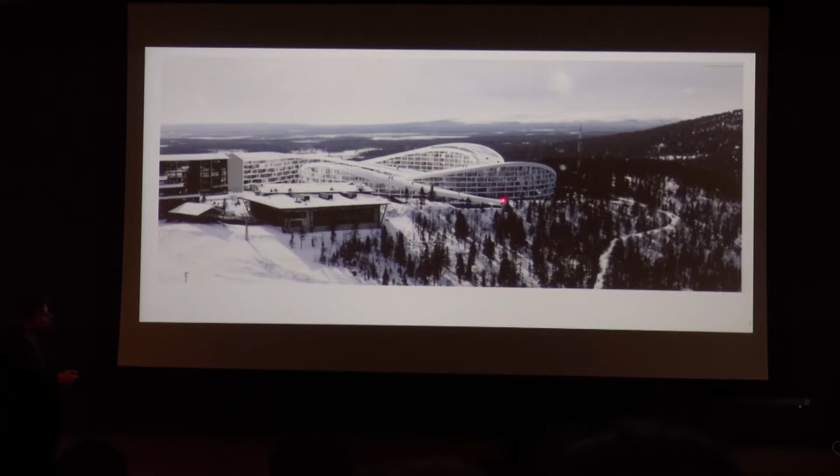And finally, the coldest climate we've ever worked in: we're doing a ski hotel in the north of Lapland in Finland. It's placed on top of the ski terrain, and we've designed the buildings so that they frame a courtyard, and all of the suites face the sloping roof, and the main elevator core actually takes you to the roof, so that in the morning you take the elevator up and then you ski out on the roof. You're already part of the ski terrain.

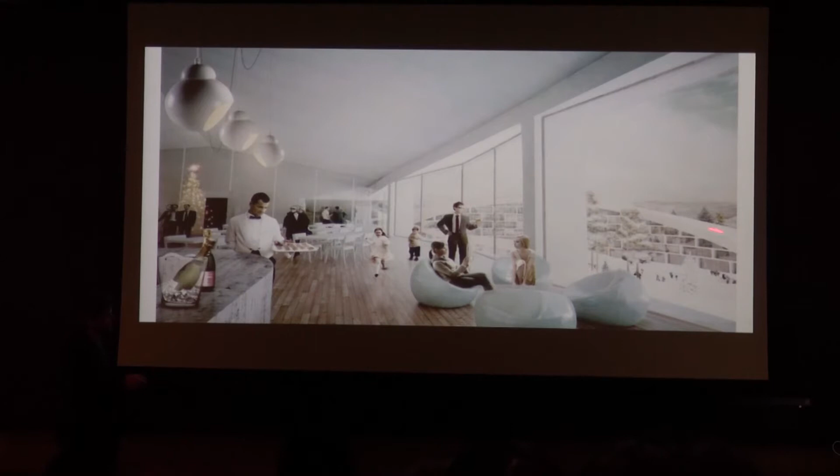And actually we made the whole master plan so that no surface has a slope that is more horizontal than 7% of inclination. So this is the first manifestation of literal ski in, ski out. You will never have to take your skis off. And of course, as a result, the spaces inside get this character of the sloping roof. And when you look out at the neighboring buildings, they're almost an extension of the landscape.

Having completed this journey, there are a lot of different strategies - it's not only the response to climate, but so many different factors that can influence architecture. We're making one project right now that somehow sums up all of the things we've been working on for the last 15 years.

It's a project we're doing on the waterfront of Copenhagen, and it could be the landmark of Copenhagen in a few years. But it's not a royal palace, and it's not a cultural palace. It's essentially a power plant that turns household waste into electricity and district heating.

Basically, all of the citizens of Copenhagen throw out their trash, and then it comes back in the form of heat and electricity. If you look at trash as a resource, 1 ton of trash contains 1 2/3 of an oil barrel of energy.

But these facilities operate on an economy of scale, so they are basically big, ugly boxes that cast shadows on the neighbors and block the views. This is going to be the tallest and biggest building in all of Copenhagen, and it's right next to the Copenhagen Marina, where the locals go water skiing.

So we thought, how can we design this in such a way that it becomes a contribution to the neighborhood? And speaking of skiing, Danes love to ski. We have snow, but we have absolutely no mountains - we have to go to Sweden or Norway or the Alps. But apparently we have mountains of trash.

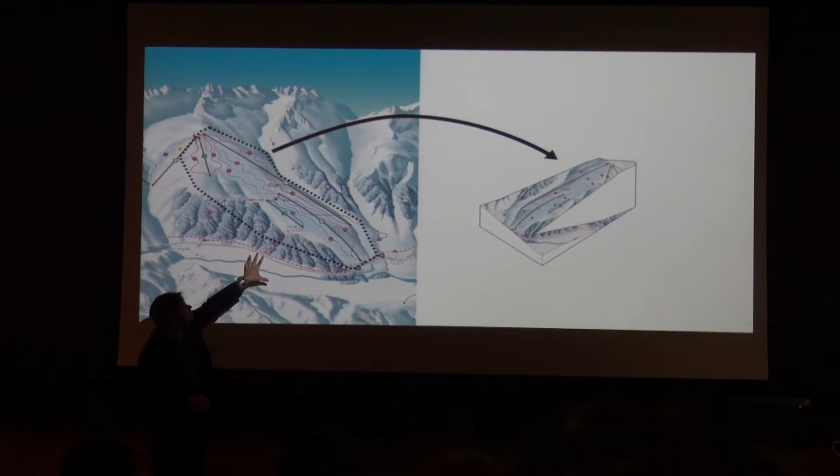So we know exactly how big this facility is going to be - it's going to be more than 300 feet tall. This is the closest ski mountain we have to Copenhagen, it's 6 hours away in Sweden. We can do 2/3 of that on the roof of our building.

So basically, we just follow the different machinery. We design the roof of the building as a continuous slope with a blue, a black, and a green ski slope. It has a lift system and also a vertical elevator. We place real pine trees on top of the columns, so you actually get an actual man-made mountain.

We did this in a competition where they asked for a power plant, and miraculously we won the competition with this idea. Suddenly we had to figure out how to do it in real life.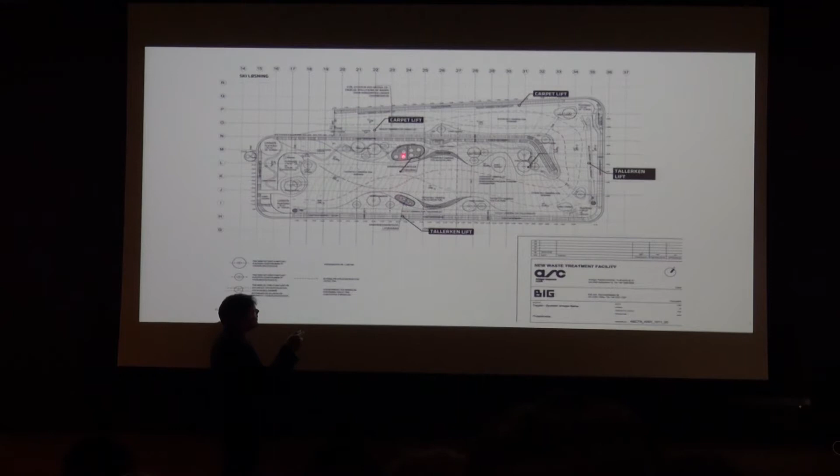Even you can see this is the roof plan, and these are emergency vents. So you have almost this sort of volcanic activity inside the hill that has to come out in different ways.

Also, to give you a sense of scale, this is an Olympic half pipe - it's actually twice as long as an Olympic half pipe. It's a pretty serious mountain. You also have a hiking path.

Like in Sochi, Denmark won 0 medals. We hope, because now we can practice at home, maybe we can improve on that statistic in the years to come.

For people who don't want to ski, you actually have a hiking path where you can go up and enjoy the view of the otherwise completely horizontal city of Copenhagen. We're going to have the tallest climbing wall in the world - 300 feet of ultimate danger.

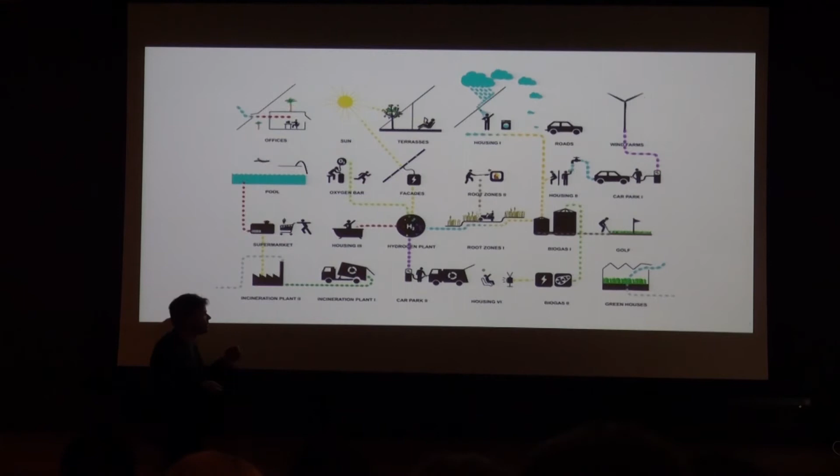And basically the reason that this was even possible is because this comes quite close to realizing this diagram I showed in the beginning, this idea of thinking about cities and buildings as man-made ecosystems - not only do we harvest the local resources, the rainwater for the green facade, natural daylight, natural ventilation, but also together with the city of Copenhagen, the power plant forms like almost an urban metabolism, converting waste into a resource.

But the reason that we could actually win the competition with this idea was because one thing that is unique about this power plant is that it's the cleanest waste-to-energy power plant in the world. The smoke that comes out of the chimney is completely non-toxic - it contains some steam and some CO2.

So in a way, by turning the roof into a ski slope and a public park, we make apparent something that would otherwise be invisible, which is that you actually have, if you like, fresh mountain air on the roof of the power plant - to completely transform the perception of what a power plant can be.

We decided to play with the chimney, and we worked with Realities United and Copenhagen Suborbitals and the Danish Technical University to design the chimney in such a way that it accumulates steam, and then at regular intervals it puffs a gigantic smoke ring.

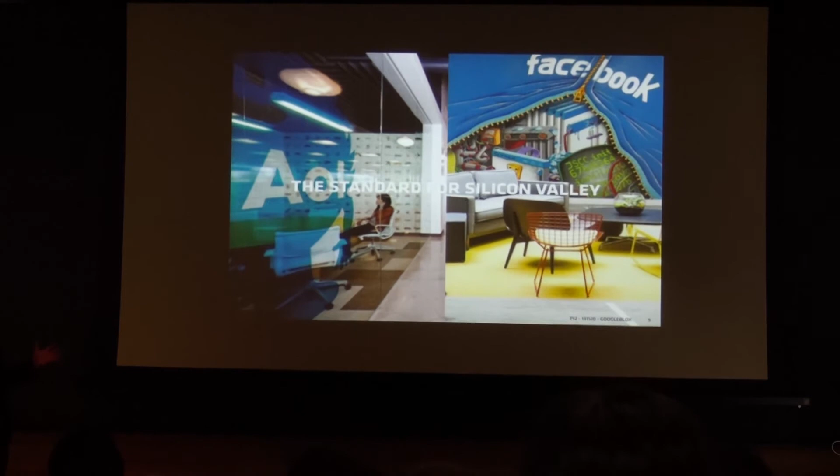But basically, we were asked to look at reinventing what could be the workplace of Google, and Google somehow became famous for these colorful and playful interiors with active environments, bicycles, and healthy food snacks. And suddenly, Google became the standard for Silicon Valley and even contemporary creative new economy workplaces.

Meanwhile, Google has gone from being the startup company to being 30,000 people worldwide. They also went from being purely immaterial to creating cars, creating hardware. If anyone has tried Google Cardboard, it's pretty amazing, this completely low budget, immersive experience. And if you look at Google in the context of Mountain View, the Google campus is pretty much the same size as the main urban streets of Mountain View, which is true for almost all of Silicon Valley, where for each town you have an equivalent corporate town of similar scale.

So we spent the last year working with Heatherwick Studio and Google to create what could be the future workspace. I'll just describe the principles: right now Silicon Valley really looks like a giant parking lot with some office parks, so the idea is to bring nature back into the space both outside and inside, to create a very configurable human scale that is incredibly interactive, and finally to create these super light, transparent canopies over the workspaces that give you the feeling of working outdoors, even with controlled daylight and air quality.

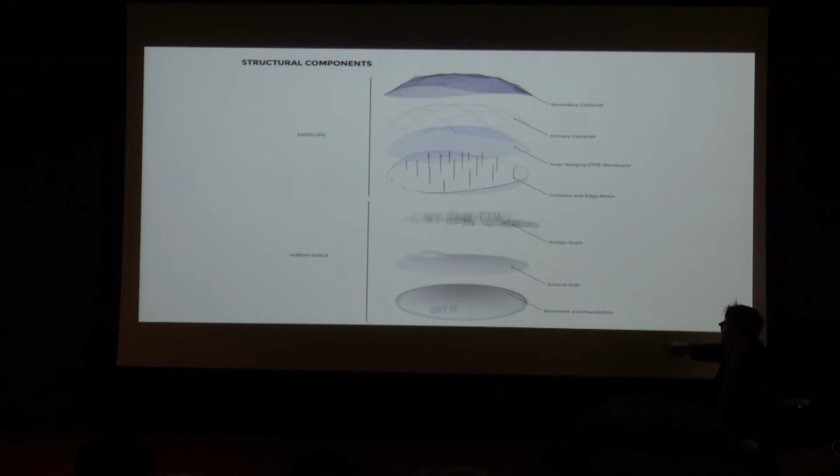So the canopy is designed almost like a glass fabric stretched out over a series of columns, creating these very light enclosures.

At the edges, we lift up this transparent skirt to allow the content inside to spill to the outside, but also to invite people inside. So on the ground, we try to concentrate the public-oriented activities. It can both be auditoria and communal spaces for the Googlers, but it can also be retail for the public. Inside, the furniture underneath this glass fabric takes care of the weather, air quality, light.

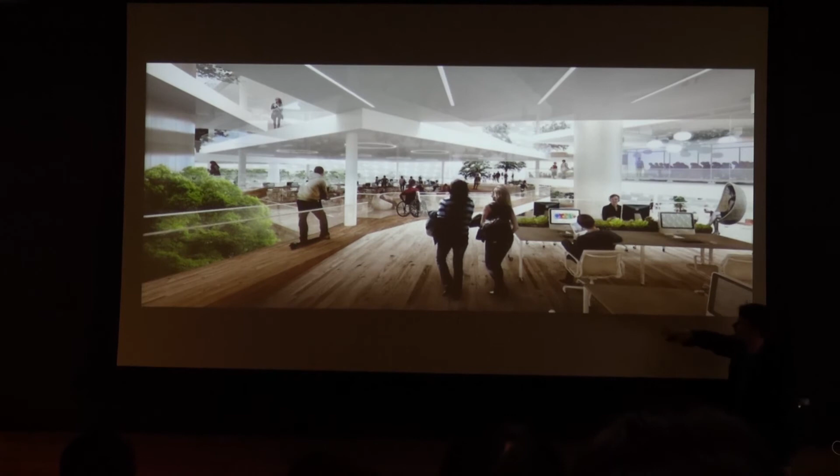The configuration of the workspaces almost becomes like interconnecting platforms. In some cases, it's almost like a man-made mountain of different platforms. In one place, even though it's a multi-story building, each workspace connects to the next, so you can walk to every single workspace in the area without ever taking a stair or an elevator. Other places, we make it more like a city with streets and bridges that connect the different workspaces across the streets. Other places, it's more like a European village with quirky, undulating spaces between the buildings.

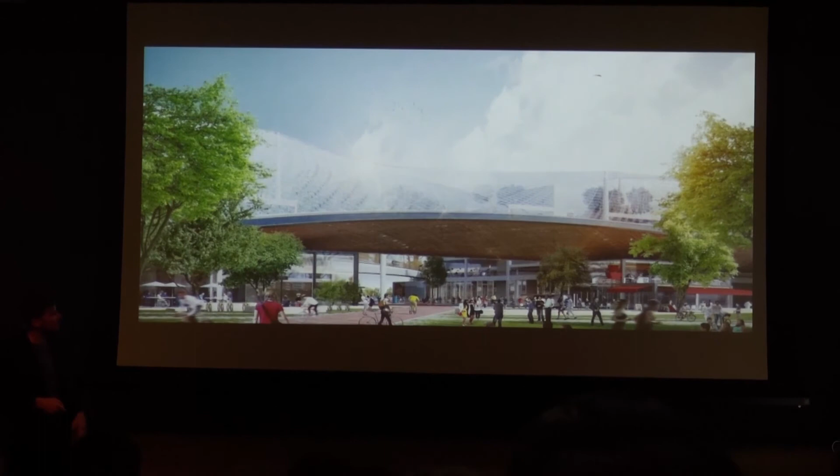Sometimes we allow the public to actually pass directly through the buildings. Other times we lift up the skirt and invite the public to pass inside the building underneath the canopy. Some places the entire building lifts up and creates a marketplace that is fully outdoor but undercover. Sometimes we lift the edges to create street fronts so that people living in the neighborhood won't just see an office, but will see different restaurants and shops that create a more lively street experience.

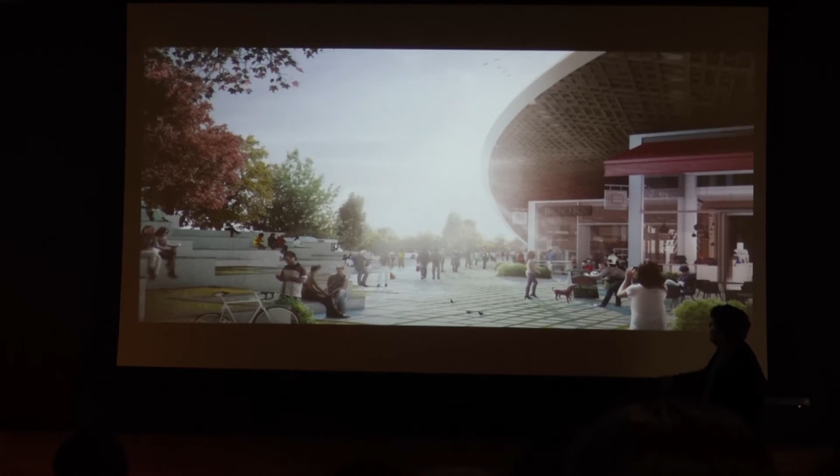In some places, two adjacent buildings are actually connected. The landscape rises and leaves space for an arena that connects the two buildings. So you have this glass canopy that creates a protected environment, and then the edge that makes sure that even though these are rather large structures, you always have a very inviting, human scale when you connect to or reach the building.

We've been working on this for the last year, and you can see how the sea of parking has been completely replaced by bringing the nature and the water back into the valley. We just submitted the designs for the city of Mountain View for approval, and in a month's time we'll know how to proceed. But essentially, it's been a total fairy tale.

I really look forward to being able to talk more in detail about what we're doing, because I think in this case, I've been used to being...

My role has often been, in our collaboration with our clients, to take all of the requirements from the client and find ways of knitting them together in such a way that we give the client everything he or she asked for, but in a way that they couldn't have imagined, breaking them a little bit beyond their traditional comfort zone. In a way, inviting them on a journey where we end up going maybe a little bit further than what they had imagined.

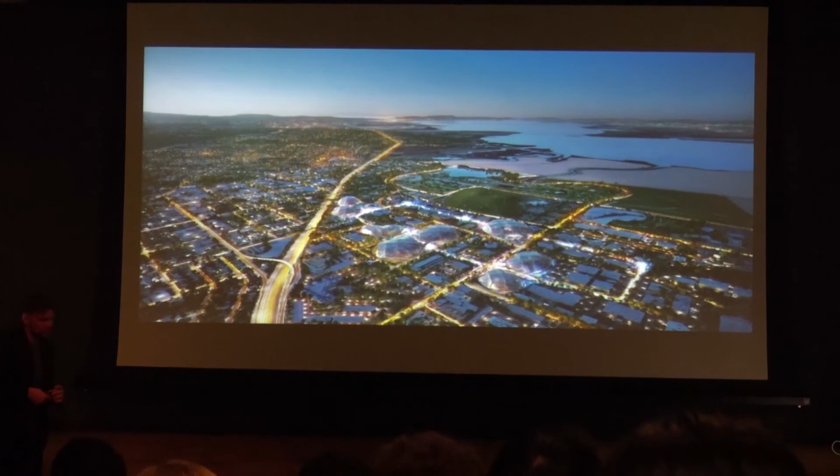So in a way, they're prepared to absorb incredible costs into development if only it creates something that can actually be applied rationally and effectively afterwards. It's been a total adventure. One of the first conversations where I really realized we were dealing with a completely unique opportunity was when Larry Page was talking about a technology I hadn't heard about before, and I asked, is this already available on the market? He said, we looked a little bit into it, there's nothing really working right now, but I don't think it's anything that $50 million can't solve. That's a completely new attitude, and I'm quite excited by what can happen to architecture now that a company like Google is putting all of their resources, know-how, and capacity for innovation into the architectural realm.

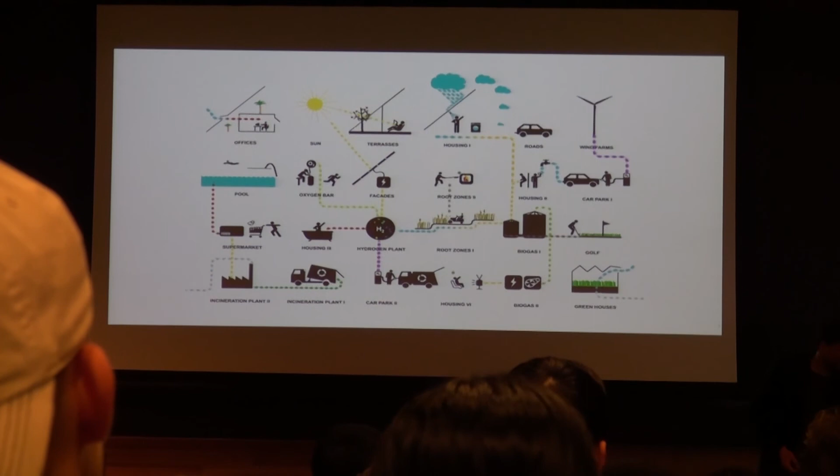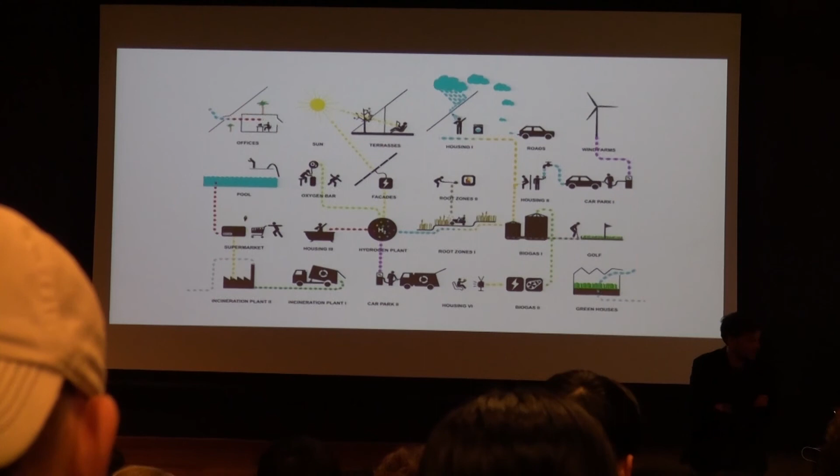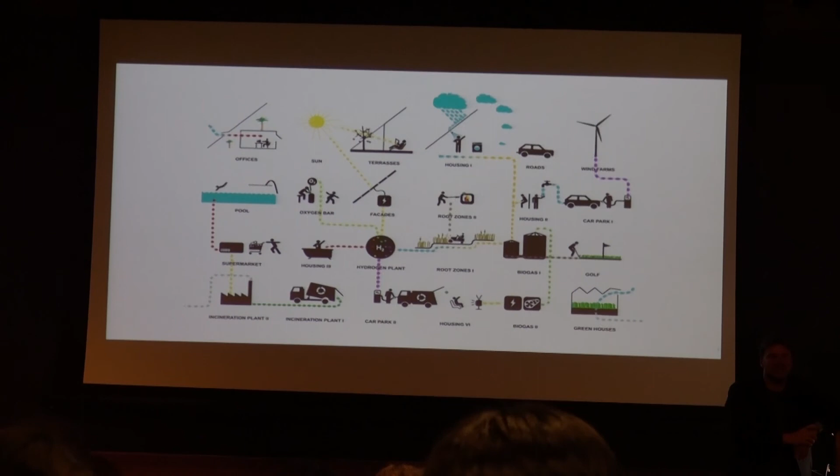Recently I had a discussion with another Danish architect who gave the criticism that here in the United States, our architecture is actually driven by developers, and one of the reasons the US is not a leader in sustainable architecture is because of this, whereas in your home country and countries like Sweden and Finland, the architecture is actually architecture driven. What are your thoughts on this? I don't know that architecture is ever architecture driven anywhere—we're always asked to solve a problem, accommodate an activity, or meet some kind of demand or requirement or concern. Like when I go to Japan and see what SANAA, Sejima, Nishizawa, and Fujimoto are doing, you think either they're hypnotists or Japanese people are crazy, but of course they meet the same practicalities. We saw one of Fujimoto's buildings where everything is 5 centimeters, like 2 inches thick, and we wondered how do you deal with insulation, because it freezes and snows in Tokyo—turns out it's insulating paint. So I think as an architect you have to find ways of turning the success criteria, the dreams, desires, fears and concerns of your client into the driving force of the design. I never argue anything with architecture because nobody would take it seriously, but once you can argue, like in the case of Vancouver, that we can increase your density by 50%, and it's the nicest 50% because it's the upper condos—if you take a typical 850 square foot condo unit in Vancouver and move it one floor up, it's $15,000 worth more—then if you find a way of taking your client's success criteria and turning it into the driving force of an architectural exploration, suddenly it can feel architecturally driven, because it's the way you put the design criteria together that actually drives the process.

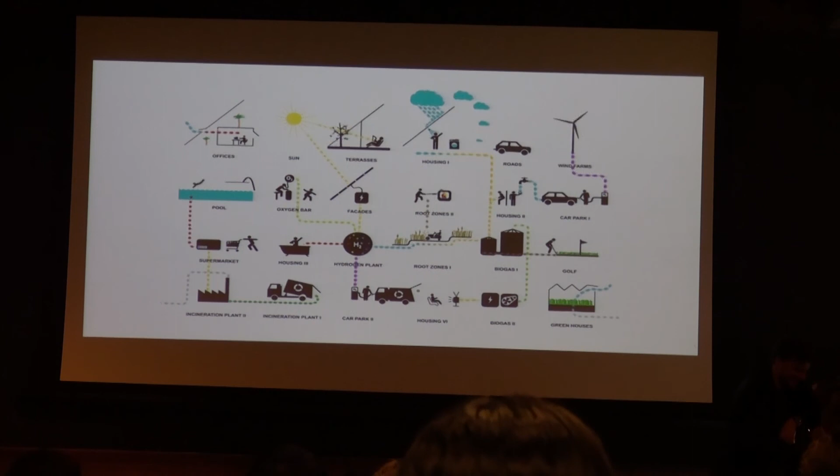Okay, more questions? No? We are done. Was there a question? Huh, one more? Wow, okay. Before we go, I'm going to ask Bjarke to sign a book for the library, but because we're very cold here, I'm going to give him a scarf. Yeah, awesome, you have to sign our book for the library. Fantastic.